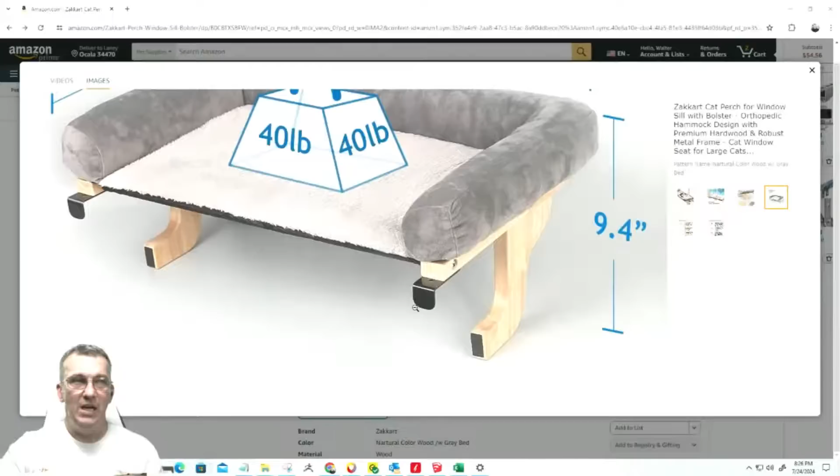Our hooks, the hooks that go over the windowsill - yes, we could probably find these somewhere and buy them in bulk, but it's going to be easier for us to buy the bar stock, cut it to length, make a jig for bending the little hooks, drilling the holes and everything. We're going to make our own from raw bar stock, so that'll hook into the windowsill versus trying to buy a 20 pack of this or that and it not being the right product or the right size. Because most windowsills, on that hook, about a 1/2 inch is all you have to work with, so the hook can't exceed a 1/2 inch, otherwise it won't sit properly on top of that sill.

So this is kind of the market item we're going for. If we look at cat perches for windows, they have suction cup perches, wooden ones, wooden ones with engravings, and wooden ones that are like hammocks. That cat looks scared as all because he knows there ain't nothing holding him up but this piece of cloth that's sagging. There's no support there, look at that shocked little cat. But there's a lot of them on the market, ranging from $40, $39, this and that, with 4-star, 5-star ratings.

People are buying, right? So 50 of these products bought last month — not a big market share, 50 isn't a lot in a month from Amazon. It's a small amount, but 1,000 of these wooden ones were bought in the past month. That's getting more like it. I'd love 1,000 sales a month for my items, but there's a lot of them out there, so they're saturated in the market.

Now, in the files that I gave you, each and every one of you have a spreadsheet. This spreadsheet is a business product pricing workbook. I spent a lot of hours creating this workbook, things are linked together, and there's formulas and all kinds of stuff that will help you with setting up your products and all.

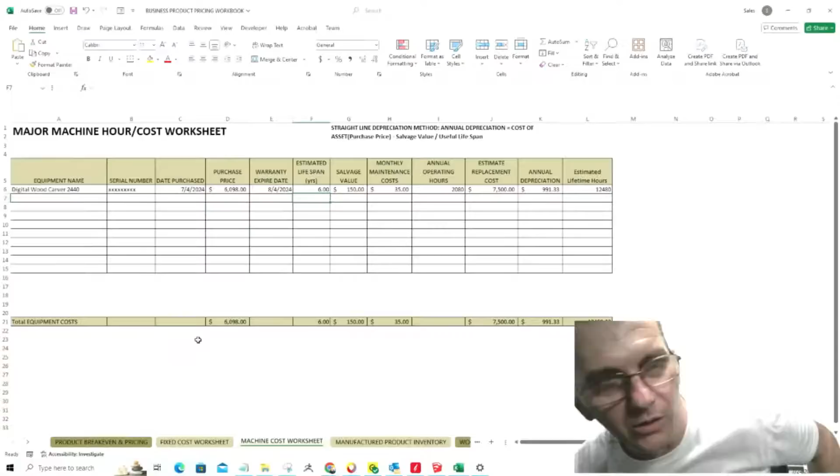We're not talking every little router and sander and everything. You got those little handheld tools, they don't mean jack. Machines, your capital assets, your CNC machine, anything over $1,000 essentially, basically. Your CNC machine, large table saw, big drum sander, whatever you might have, your capital assets, not your little handheld palm rotary sander or your $200 miter saw. That doesn't go in machine cost.

In this example here, we have a digital wood carver 2440, purchase price $6,098. Now we want to keep track of when the warranty ends on this. Estimated lifespan - how many years do you realistically expect this machine to be in production? And at the end of those years, when its usefulness has kind of run out, what's our salvage value? If I were to take this to a scrap yard, what could I salvage it for?

Any monthly maintenance costs on it, your operating hours - what realistically do I expect to operate? Now for my machine, I expect to operate 2,080 hours a year. That's 8 hours a day, Monday through Friday. So annual operating hours on that machine, if production is good, that's what I expect that machine to run. That means I have an estimated lifetime hours of 2,080 times 6 years, so there's 12,480 lifetime hours on this machine.

So in depreciation, every year your machine depreciates. Basically depreciation, for those of you that are unaware, you have your purchase price, you subtract your salvage value from that, and divide that by your estimated lifespan. So in my case, 6,098 minus that 150, divided by 6 years. So each year I'll be depreciating $991 a year on that machine. Alright, so once we have those, fill out the form.

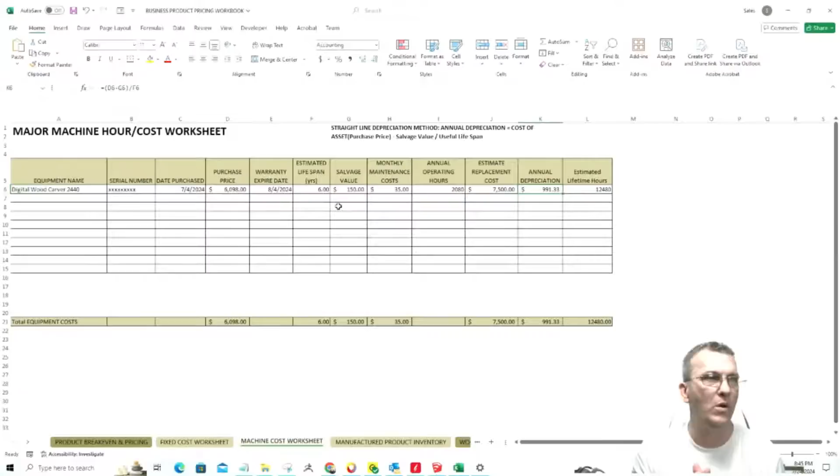Know your stuff, get your machines figured out. And if you don't know the exact answer, just figure out what you want that machine to be. If I thought my estimated lifespan was 10 years, which I could absolutely get out of a CNC no problem, but I think in 6 years there's going to be more advanced options I can go out and buy. So this particular machine will be in production for 6 years, 12,480 hours roundabout.

Alright, so once we have our machine cost, and in our other workbooks here we have our products that we're going to make. We'll come back to that one last, but wood inventory. In this particular sheet, there's drop-down lists of all your plywoods, or majority of the major ones, so you can choose from the drop-down list. And for your dimensional lumber, there's a list of different types of lumber and wood. But you're going to fill in the blanks: length, width, thickness, and the grade.

In this case, Baltic birch grade BB. Side B means that one side is great, beautiful - the other side is not so much. So it's a BB, right? One side is beautiful, the other side is basically beautiful. That's not what the BB stands for, but it's not a premium two-side.

But in this case, we need to break it down, right? This 4x8 sheet has got to be broken down into board foot, square foot, and square inches, because some of our projects only use a certain amount of square inches. And then what is our price per sheet? Now, it used to be I could get a sheet of Baltic birch 4x8 for $30 a sheet. Now roundabout, we're in the 100 something.

$98. Are you guys still with me? Am I losing something, JR? No, I'm good. Oh, okay.

And so now once we know our price and everything, now the formulas are going to start kicking in. It's going to tell us our price per board foot, per square foot, and per square inch, right?

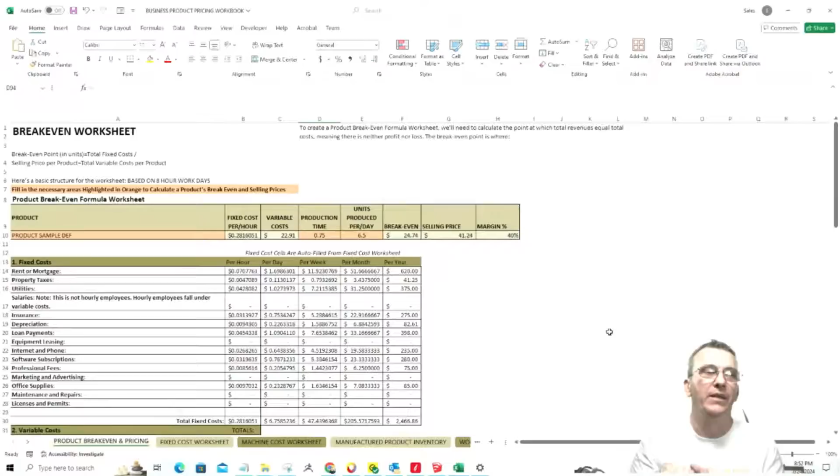But what does it cost to actually make that product, to get it made and out the door? That's what we have to determine. And then that's going to help us determine what our sales price is, our margin, and things. So let's take a quick look at this sheet.

Now, what this sheet does is this top area allows you to — you don't put your whole inventory in here, it's one item at a time. You're using this one sheet to determine what your price is for a particular product, your break even and your sales price.

And so in this case, I do have a drop down, so any of the products that are in my product list, my inventory list, any products there will show up here. So I can say, okay, I want to know what my product pricing is for product ABC.

Now, right now the fixed cost per hours, the variable cost per hours, the break even, the selling price, and the margin — those are all formulas, those are going to get populated. Those gray areas are going to get populated by the sheet below. The orange areas are the areas that I need to fill in.

What is my production time? Again, from machining to shipping, whatever stations it's going through, how long does it take? And this isn't like hustle, bust your ass —

going to frantically do it so I can do it in the smallest time possible. Working at a regular, normal pace with regular breaks and potty breaks and all of that stuff — what is the time from start to finish on a product? If we spent time working on a product, what's that time? And anything beyond that's called slack time, we'll talk about that in just a second.

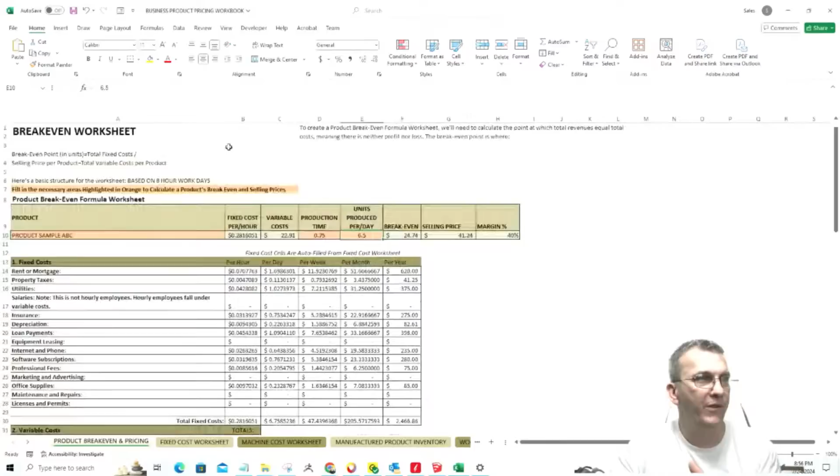Now let's come down to the variable cost. Just so you know the formula, what we're dealing with here: our break-even point per unit is our total fixed cost divided by the selling price per product minus the total variable cost per product. And so in our case, the total fixed cost per unit, per hour, are going to be up here. So for this one, the total fixed cost is about 28 cents, 29 cents, per product.

But let's look at our variable cost. So let's start with labor. Labor is time times wage — that equals labor. So with time, we have our hours worked. Again, regular work hours, not rushing, trying to get things done — regular working hours. Come in, clock in, do my job, clock out.

Breaks, potty breaks, lunch breaks, smoke breaks, whatever it is, all those other activities fall under slack time. It's hard to keep track of all that, when somebody goes to the bathroom and everything. So we're going to use a fixed percentage, about 25%. 25% of our 8 hours worked is going to be breaks, lunch break, breakfast break, potty break, that kind of thing. So we're going to use 25% as our slack time.

So in this case, on this product, an hour and 45 minutes was worked. The slack time was about 43 minutes of that, potty breaks, lunch break, 15-minute break kind of thing. So the total remaining time is 0.77 hours, about 47 minutes of work time on it. Again, I can produce about 6.5 units per day.

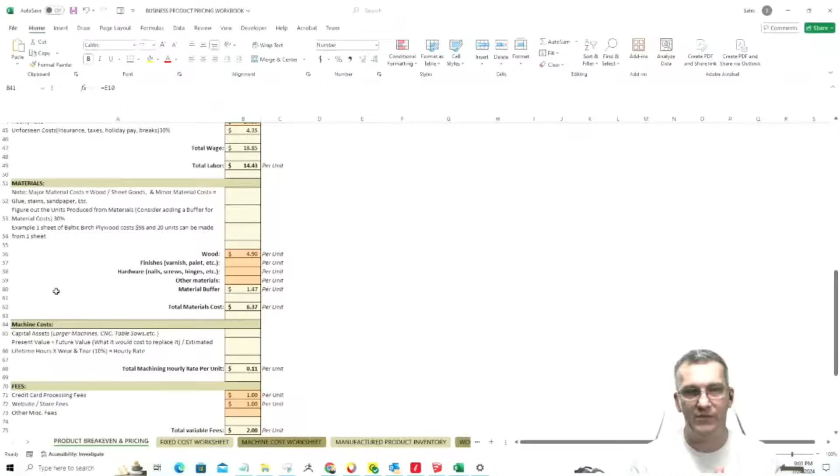Machining costs - so when our machines are running, the capital assets, large machines, CNCs, table saws, etc., not your little palm sanders. We have our present value plus our future value, we'll talk about future value and go back to the sheet for a second. Future value basically is what it would cost to replace that machine. You figure out what it would cost, divide that by your estimated lifetime hours, then multiply by your wear and tear, roughly about 10% wear and tear. That gives you your machine rate.

Now, if we go back to our machine cost worksheet, on my $6,098 CNC machine that it cost me to purchase, in the future, if I ever had to replace it, I'm estimating it's going to cost me somewhere around $7,500, because of inflation, it's not going to be cheaper, it's probably going to be more. So to replace that particular machine, I'm estimating it's about $7,500. Coming back to here now, the total machining cost - our present value, $6,098, plus our future value, $7,500.

Divided by the estimated lifetime hours, 12,480 lifetime hours, and then multiply that by 10%. We've got a machining cost of about 11 cents per unit.

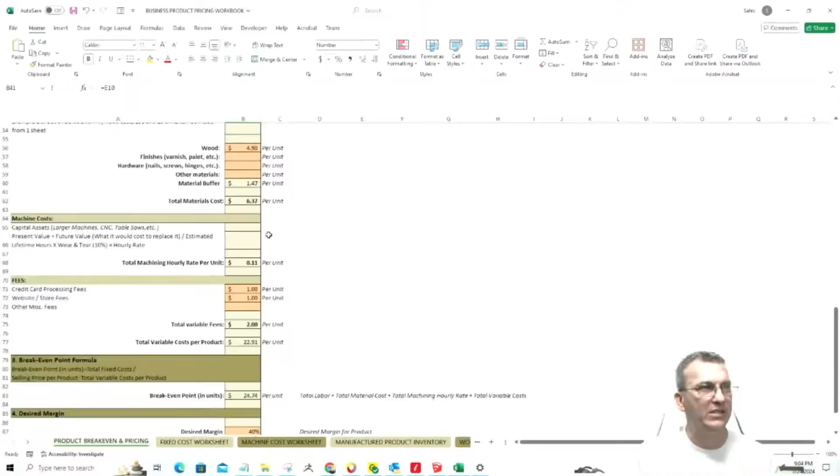$22.91. So I take that $22.91 for the break-even point. Break-even is total labor plus total material cost plus total machining hourly rate plus total variable cost, all added together. So I've got $22.91, 11 cents, $6.37, $14.43, and that is it. So we're at about $24.74 per unit.

Now ideally, the desired margin that I want to make on this product, I can set my own margin, and that's all going to come from market research. I can set whatever price I want to sell this item for. If it doesn't sell, I need to change it, I need to look at it. So what's my desired margin? For this, I'd like to make a 40% margin.

So I take my break-even point and divide it by 1 minus the desired margin. So 1 minus, in this case, 0.40, that divided by, which in this case is 0.60, if you want to know. So 1 minus 0.40 is 0.60, okay. So if I take my break-even and divide that by 0.60, my total selling price is going to be...

$41.24 on this particular product. That's if I want to make 40% above my break-even, that's where I'm going to be at. So I can sell this for $35, or I can be at this price if I want to make my 40% margin. But having that margin gives me room to work with for sales, discounts, promotions, and things like that.

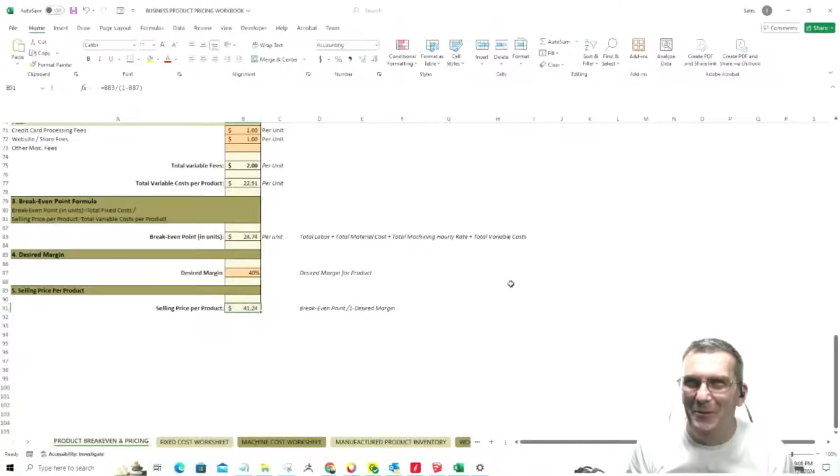People will pay a premium for a premium product. You get what you pay for, and sometimes lower isn't actually better. I've sold things where I felt like I don't want to be too high, I want to be fair and fun and just give it away. And it shot me in the foot. One, I wasn't making hardly anything on it, and also it kind of cheapened my product.

Sometimes I'm overpriced and it just doesn't move, but then I find that sweet spot where things are going well. Now that I know more, I have more control on my business expenses, machining and labor, and I'm the only labor there is. I have an hourly rate myself, kind of thing, I pay myself, but all that stuff is figured in. Once I know that, I can figure out these things, and this sheet is hopefully to help you with that.

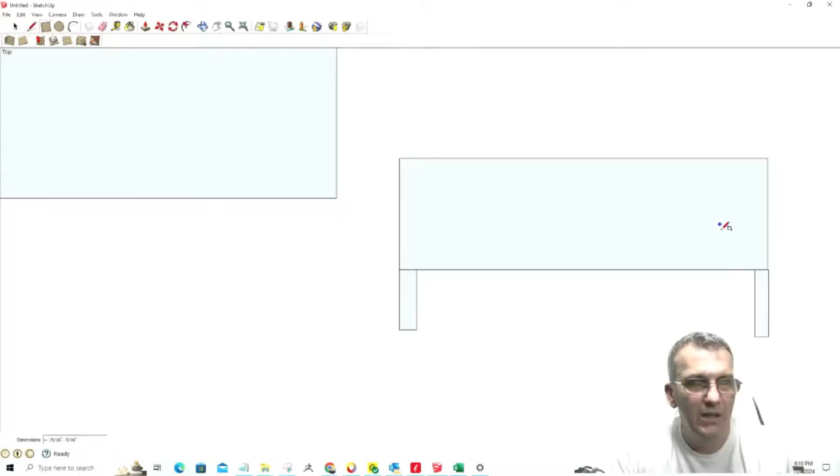So on my side view, I'm going to have the brackets, which we're going to actually create in just a second. I'm just giving you a rough drawing here. And then on this particular piece, this bracket, there's going to be a rabbet, and that's in the wrong spot. Bear with me just a second, let me undo that.

There is going to be a platform that spans between these two brackets. It's going to be flush with the top of the brackets. The brackets are going to be able to slide back and forth. We'll have our screws and our inserts. But this top big box, that's my cushion, it's going to sit on top across the whole thing, covering all the way across, and it's going to have a nice flat, sturdy platform, no little rods. We're going to be above and beyond what anyone else is doing, and we're going to be able to offer a little bit more of a premium for that. It's going to be the window perch for the Queen of Queens or the King of Kings.

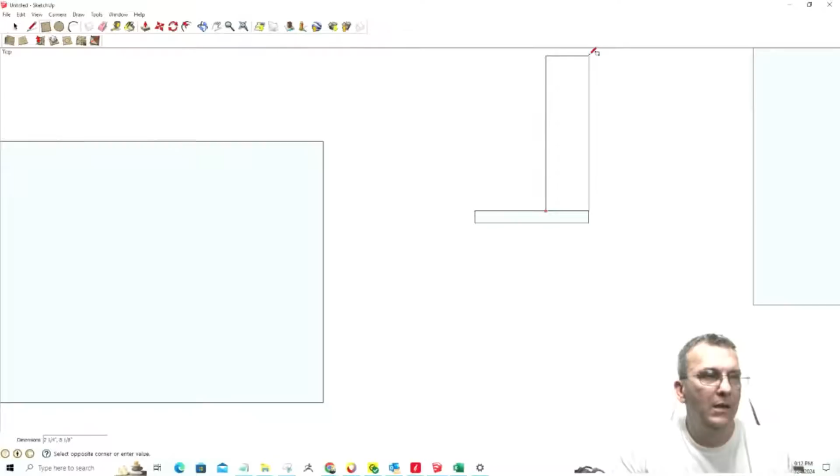So this is just kind of a general rough show of what's about to happen. So now on our part, let's first draw out a scenario of like a window sill. Imagine, if you will, let me undo this, let's go here, and let's say that, right here.

All right, let's imagine that this upper block right here is my window. This block here is my window sill, and then this is my wall. So on these three items, this lower rectangle is my wall, my windowsill, and my window. And on my window, there is a small lip that's kind of like a channel. Bear with me just a second.

Okay, my product is going to hook into that windowsill, that window framing, that metal framing. It's going to hook into that framing, and the legs are going to come down and touch the wall. Now, some of the things I need to consider: the area of the windowsill, the far side of it, and I'd like to kind of stay in line with what I saw online. So this windowsill has to be kind of an average windowsill.

My windowsills at home are about 2.5 inches. From the window to the end, it's about 2.5 inches. As long as we're under 6 inches from the wall to the end of the windowsill, we're good. From the actual window to the end of the windowsill, 6 inches. From the wall to the end of the windowsill, because sometimes windows are recessed in, that matters too.

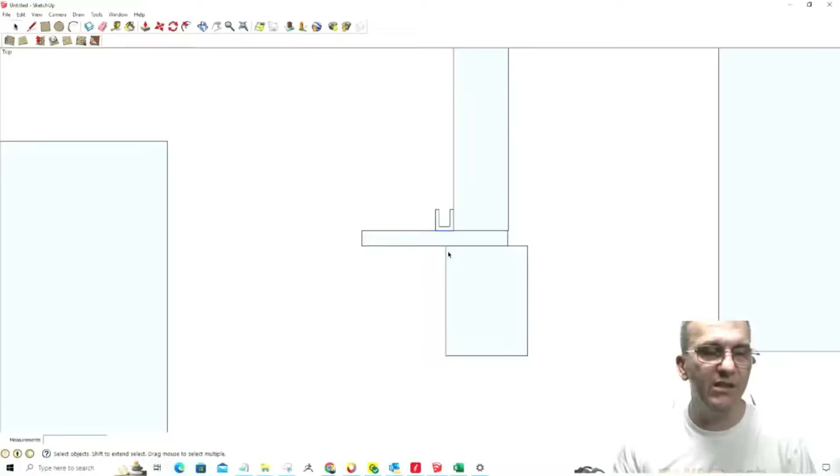I want to try to be under 3 inches, because my leg is going to... hold on, bear with me. Let me go in and trim some things.

Select this and hit delete. No, we'll leave that one there. We'll get rid of this one. Get rid of that one. Get rid of that. Hold on, leave that one there. Delete that. Okay, this one, bear with me. This one. Oh, Laney, come on now. Hold on a minute, let me try that again.

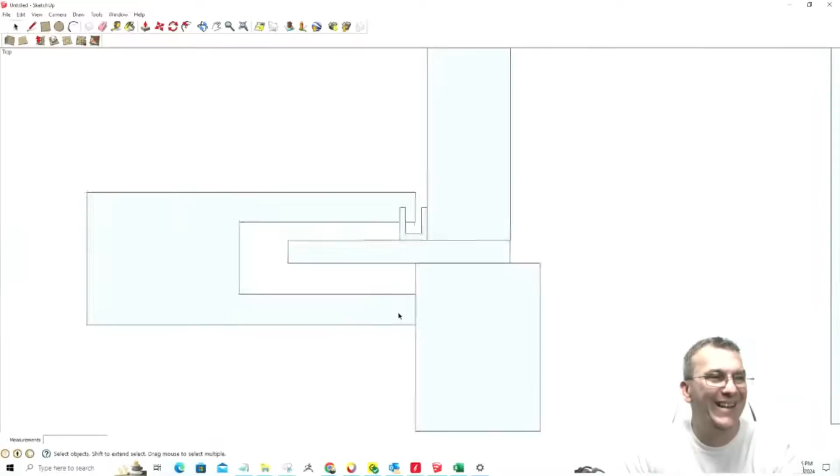Now, of course, I'm just rough sketching this to show what's going on. There's going to be a metal hook underneath the piece that hooks onto the windowsill. There's an opening that comes around, then comes in on the wall, and my bed sits up here. So this area goes up and rests against the wall. Remember, I have that rubber foot that goes on there to prevent marring. That distance, when I make my piece, can slide as far back or up depending on where my wall is.

It's about 3 inches. I'm going to have 3 inches. So I want to make sure my windowsill doesn't exceed that, or this particular cat bed won't fit that need unless I change up my bracket design or something like that. With that being said, let's lay out the actual part.

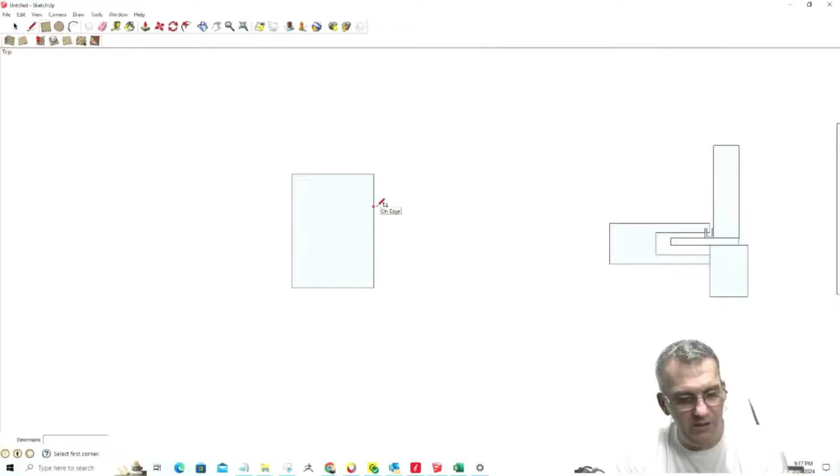Okay, so the part is going to be cut from a piece of material that's about 9 inches by, we'll call it 7, and I believe 7 1/4 is a 1x8. Do they make 1x8s or 1x9s? I think they make 1x8s. I know they make 1x4s. They make 1x6, 1x8, 1x10, and 1x12. Yeah, so 1x8 is 7 1/4. That's what I want: 7 1/4 by about 10 inches. So 7.25, 10. Let's do it the other way around: 10, 7.25. There we go.

Now on this part, so you can have a visual, let's go back to here. The part we're focusing on right now is this lower bracket right here, not the upper piece, but this lower bracket. This is what we're making. The distance from where the part goes against the wall to this upright is about 3.5 to 4 inches, that opening, and it comes right straight into the bottom of this.

Now, from the wall to the back of this part, if this was a rectangle, we're probably in the range of about 7 1/4. It could be even around 6. It could be whatever you want. We're designing it on our own right now.

So in this case, I can use guidelines to help me with my layout. We'll bring in a guideline. I don't want to bring my part right up to the edge. I want to cut the part out of this piece of wood with a nice clean cut around this bracket, and there's 2 of them we're making. I do not want it right up against the edge of the wood, just in case my edge isn't very clean.

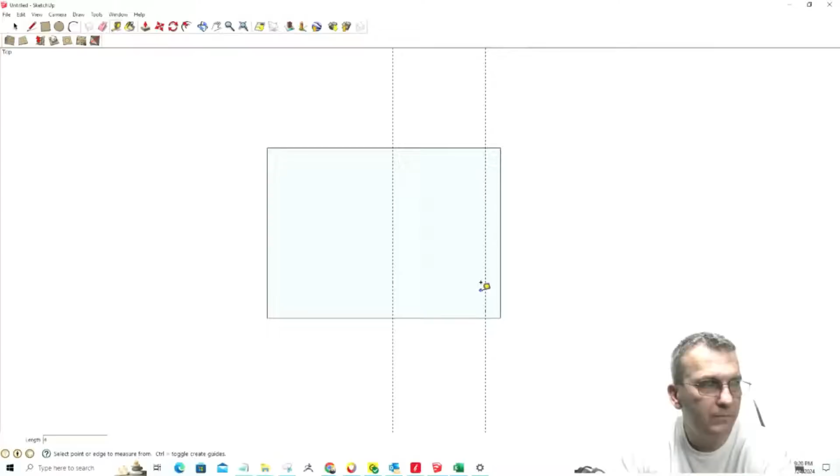And from here again, I'm going to come back. Let's say that we go a total of 7 inches. Now, from here, this is going to kind of create a bottom part.

So from here, I'm going to come up now. How wide do I want this leg? That's going to be the key thing, right? How wide do I want this leg? Believe it or not, I'm going to base that off of my rubber foot, the rubber foot that I'm going to be using.

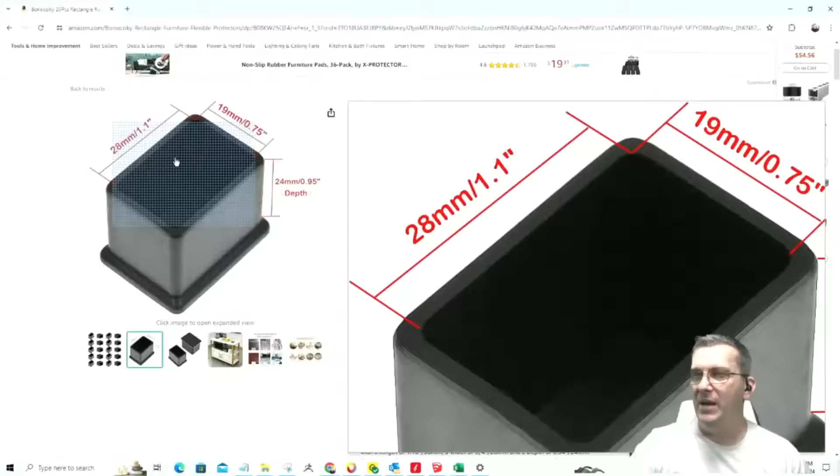It's going to look like a bit of quality. Now, on this one, it's 3/4 inches wide - that's how wide my stock is - and it's 1.1 inches wide. These come in different sizes, but with the length, in a lot of cases, what I found when looking at these rubber feet, with the length comes, instead of 0.75, it might be 0.78 or 0.8. It kind of loses its width, and I don't want a sloppy foot.

I want a nice foot that fits and everything. And I've got to keep in mind, my stock is 3/4. I am going to be doing some sanding, some light sanding - not really any need for aggressive sanding. So there's going to be a little slight taken off, but still my foot should fit very well, but I don't want it sloppy. So in this case, 1.1 inches is kind of what that foot is.

So let's come down here in our design - let me grab my tape measure again. Stop playing the game there. There we go. I've got 1.1 inches, or I've got 1.49, or 1.5 inches. We'll just go 1.5 - let me undo that. We'll just go 1.5 because it stretches.

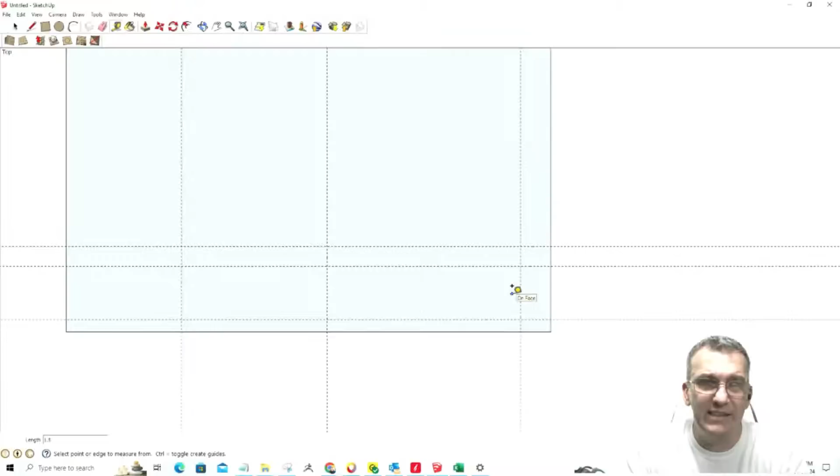1.5. And so my foot going against the window is right here. And I might like that 1.5 inch going against the window versus the 1 inch. It all depends, and it's not a lot of weight - about 40, 50 pounds it'll hold, things like that. So it doesn't have to be very big and bulky. In this case, I'm actually going to go with the 1.5.

So in my drawing, I'm going to go ahead and draw out the rectangle here all the way to here. And then this part is going to come up here all the way up. And how tall - which we haven't laid out yet, so I'm not going to draw that part yet - but how tall this piece is from the bottom of it up, it's going to need enough clearance to clear the windowsill, which is typically a 3/4 windowsill, and come around, have a little bit of an air gap.

So I'm going to call it, on that bracket, I'm going to call it 5 inches. So I'm going to come up here and go 5 inches. And I'll go ahead and draw that out. To here. Now I'm going to start - let's hide the guidelines for a minute. And I'm going to take and...

I'm going to start fancying this up a little bit. So I want to get a little bit of a radius going on here. I like a nice transition coming in. And then on the back, I can reduce some of the waste and have a nice radius come in there as well. This is going to stay square. So let's go with an arc. Let's say that I start transitioning into a nice curve here, and here, let's pick a spot.

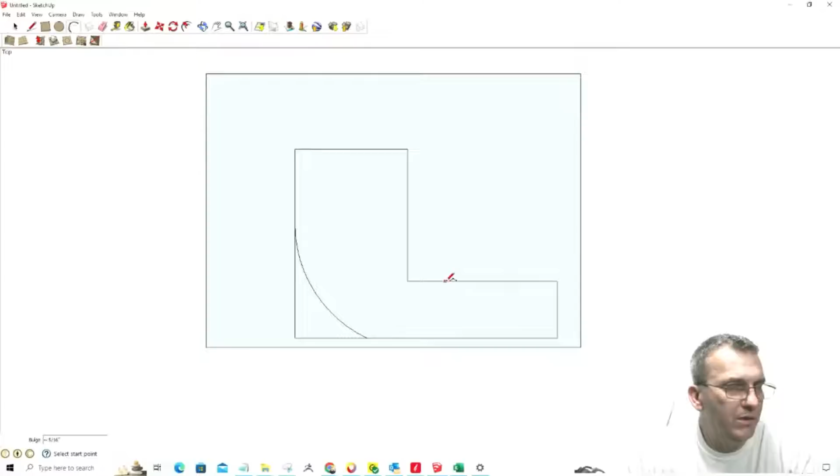I want this to start making its curve. I'll use my guidelines again. Give me just a second. Let me view the guidelines again, because I need to put a guideline at least at 3. That's 3, and that's 4. So let me find 3.5, 3 5/16, 3 1/4.

So my window sill, like I said, from the wall to the end of the window sill, it's got to be within 3 inches, right? So 3 1/4 clears me. 3.5 is better, and that kind of thing.

So what I want to do is start transitioning here. Let me go back to the arc tool. And let's turn the guides off.

Now, the thing I love about SketchUp is I can come in and start taking things away once I have them drawn. Now I probably want this to be a little bit smoother, but I will fillet this. I'll smooth everything out in Vectric. When I'm laying out the part to cut out, I'll do all the smoothing of the fillets and fine tune everything. SketchUp I just use for my rough concept, but then I'll fine tune everything in Vectric.

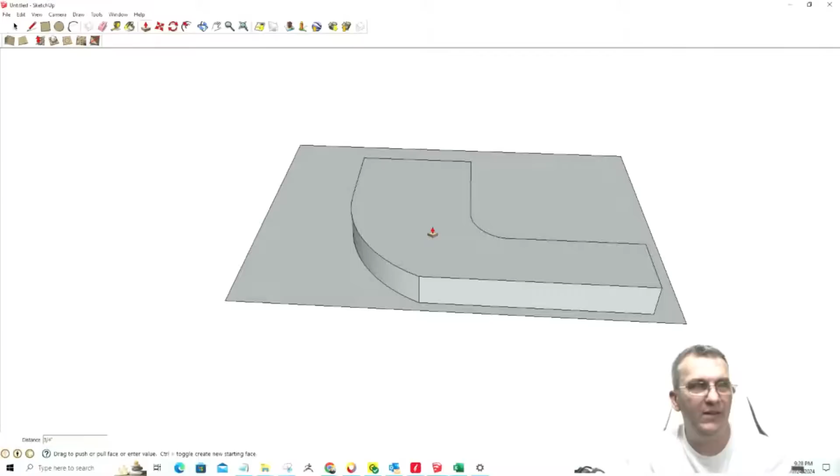All right, let's go ahead and start doing some push-pulling here. So let's go to P for push pull. This part is going to be 0.75 inches thick. We can get rid of that. Delete.

Now, on my part, let's get a guideline in here, and let's find our center point. Oh, got to turn the guides on. Yeah, about coming in from the edge, I want to come in. My hole, my 9mm hole is about

That I literally do not want. I want to make my hole that size. I'm going to use a 9mm drill bit because that's what comes with the threaded inserts. So that's the size bit that I'm going to use. I'm also going to buy some extra bits in my inventory for production and all. But I want to make sure that when I'm making my drill hole here,

0.354 divided by 2, give me just a second here. Sorry, ladies and gentlemen, got to cheat tonight. Calculator. 0.354 divided by 2 is 0.177. When you're drawing circles in SketchUp, it's radius, not diameter. So 0.177.

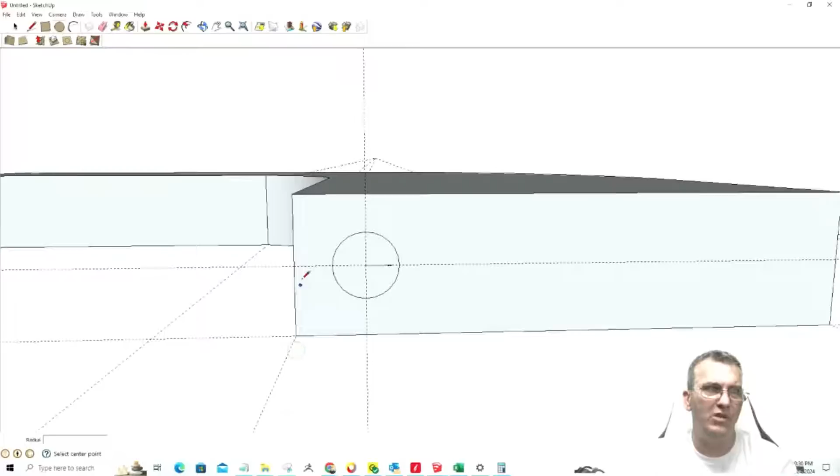I want to make sure that I have plenty of meat on the end when I put this thread in. I don't want blowout. I've got plenty of room to work with. I don't need to be so close to the edge and things like that. But I do want stability as well too.

All right, so let's come back in here, and on my guideline, I can come in a half inch off each end. And my 0.177. These will be where my threaded inserts go.

But now, on this part, right, like I said, I got to draw in the bottom here. Give me just 1 second. Let me turn off the guidelines. And let me take a straight line and go from here to here. There we go.

Okay, on this part, and of course this is an ugly looking bracket. I'm going to clean it up and make it look pretty here in just a second.

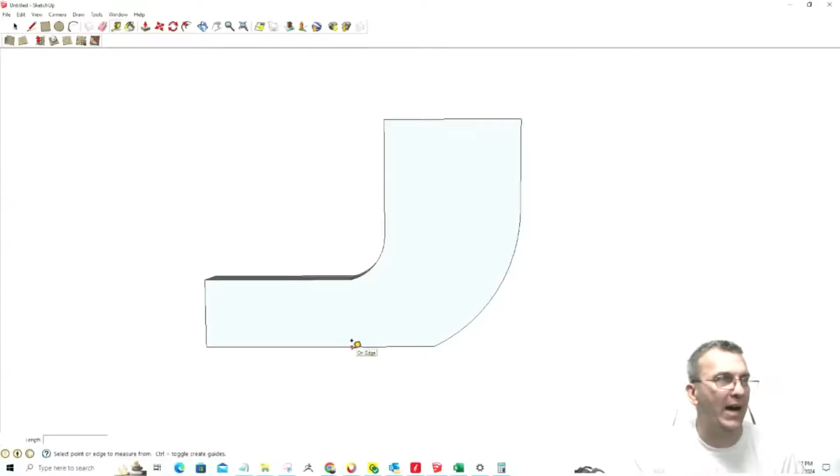But my thing is, do I want to create a jig that each of these parts can sit upright in, and they can stack side by side in this jig? And depending on the height of my jig, and in this case, remember, from the bottom to the top is 5 inches.

If I have the clearance on my CNC, can I make a jig where these can sit upright side by side and get mounted on this jig in a particular spot? I can make a platform that mounts in a particular spot on my table, and I can mill these 2 holes on each part. Or do I want to do them on the drill press? Do I want to try to do them by hand, which I don't recommend?

What can I do, right? What's going to make it easy? Can I make a jig for the drill press? I might have a nice little drill press table and a jig that, when it sits in, drills all these holes. I can move them down bit by bit and flip them around. But then it's on me to make sure I'm centered between each part when I move it to each router bit.

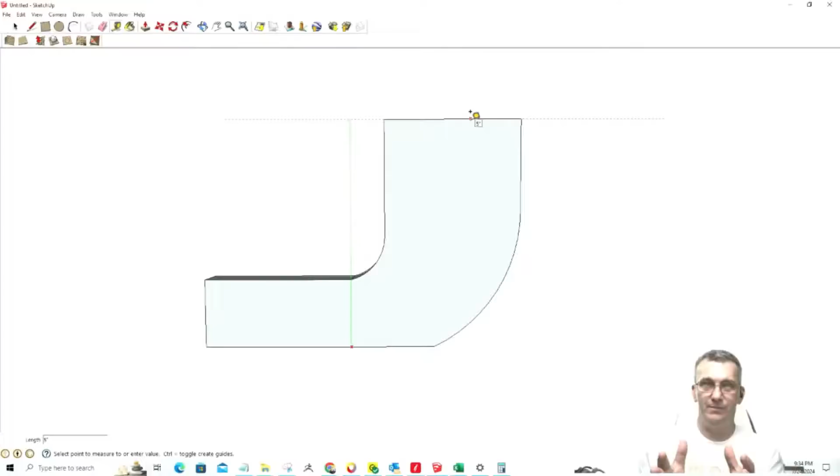But let's say I could put this in a jig. Then I'm going to draw out in my Vectric software the size of my jig, and I'm going to draw out 3/4 inch rectangles stacked side by side with my hole placement 1/2 inch off each end. I'm going to create the tool path based off the center of that, or the left side, whatever it is, of my jig.

I'm going to base that off so I can put these parts in, and it'll go mill these 10 sets of holes and stuff. On the drill press, hey, it's just time—I add that into time if I've got to do it on the drill press. But I'm also going to try to set up a production situation where I can get things perfectly positioned every time, and it might come down to something as cool as literally a jig.

We can make this all on the CNC, right? A jig with a little crank that, when my part is aligned under the bit, I can turn this crank and it slides everything over by 3/4 of an inch. So one turn moves all my parts over. It's like a little jig with a bed that actually moves.

I can use a bolt, a threaded bolt—it doesn't have to be a lead screw or anything. It could be a threaded all-thread bolt from Lowe's with a set of nuts on it. All I need is a handle, and I just need to know how many turns gets me from one part to the next dead center under my bit. So I can crank that many turns, drop my drill press, crank that many turns, drop my drill press.

And then can I turn these parts around in some way so I can do the back holes, or do I shift it? All these things—this is what I'm working out on the production side of things: what can I do to make the time to make this part less, and what can I do to make it quick and easy for me, where it's not a pain in the ass, and where everything is concise and precise, because quality of product matters, right? From the price that I'm going to be charging.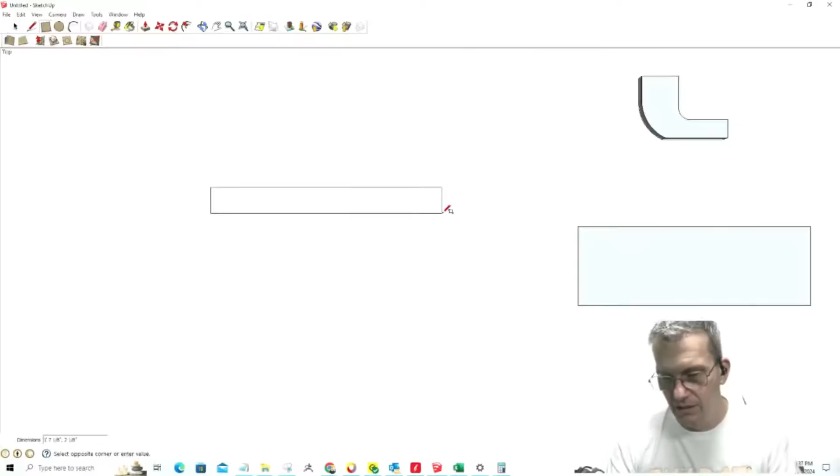Bear with me just a second. This is going to be a total length of 15 inches. And the width we'll figure out in just a minute. But let's turn my guidelines back on.

Off the edge, 0.25 inches in. Use the right tool. 0.25 inches in, there's going to be a slot. This slot, and also the slot is going to end, it's going to start 1 1/4, and it's going to end 1 1/4. So this slot...

has to be, remember, this is the slot where my bolt head is going to go down in. Remember, my bolt head is 0.5 inches, that little black oxidized bolt we talked about earlier. It's a 1/2 inch, so I don't want it tight. I don't want to have to beat the bolt down in there. I want it to be able to slide. So I don't want to have to take these bolts out. When this thing gets assembled, these bolts can get loosened and they can slide back and forth, then get tightened into position.

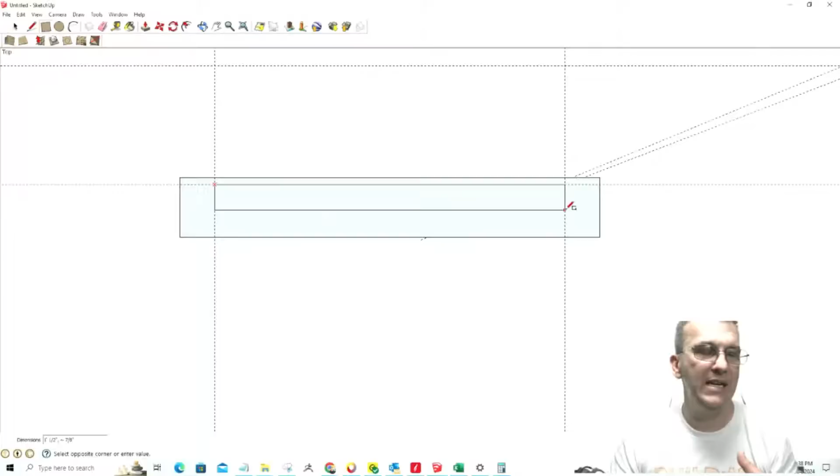So on this, I don't want a whole lot of slop, but the upper part of this is going to have a slot on it that is, let's call it 0.5625, so 9/16, so 0.5625.

Let me see what dimensions first for me. So the length, 12.5 inches, comma, 0.5625. Now, inside this slot, centered in this slot, is a 1/4 inch slot, where my bolt's going through, the bolt body, not the bolt head.

So let's get a guideline going on here, tape measure. On this center part, we'll get our centerline defined, which is right there. 1/8 inch from that center in that direction, 1/8 inch in this direction. This will be my slot.

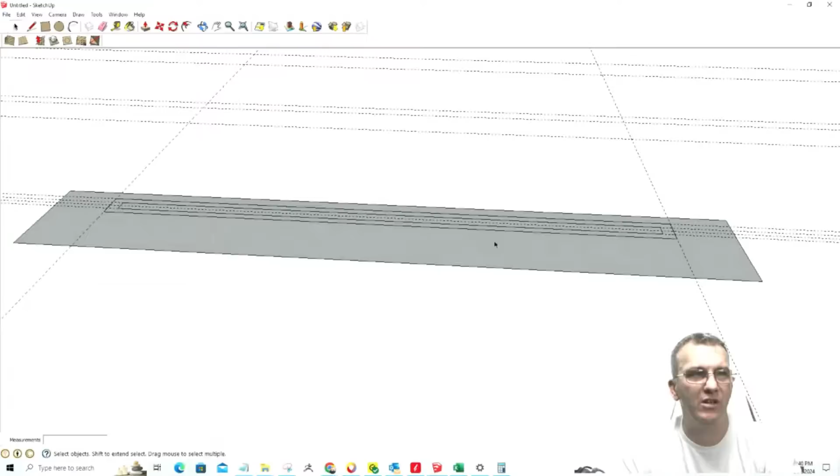And let's go ahead and extrude this up so we can start making sense of it all. It is going to be 3/4 of an inch thick because that's how thick my material is. So this whole thing is going to get pulled up 0.75. And in here, this is going to be pulled up even with it for right now. That 0.75 will bring this one up with it too, so all these are at the new level now.

All right, so this slot right here is going to go all the way through. Okay, so that one's going to go all the way through.

Now, this one is going to get recessed just a little bit more than my head thickness. Remember, on my bolt, the head thickness is 0.11. So if I go down 0.125, I'm golden, I'm good, just under the surface. I can go down more than that, 0.15, whatever, but as long as I'm 0.125, I'm good.

So in here, we will come down 0.1. I'll just make it 0.13. Okay, and let me see what I got going on here. Bear with me just a second.

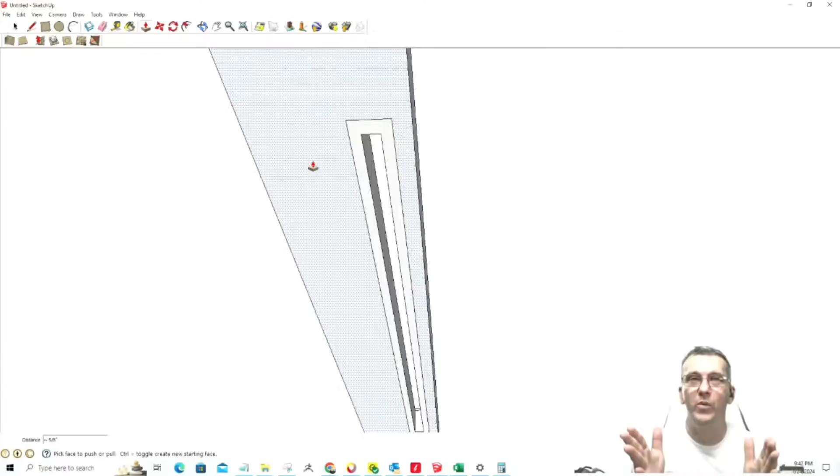Now here's the question: are we doing shoulders to where a tenon is going to go up into this area right here, and the shoulder's right on the bottom? So are we going to create that tenon, or is our whole 3/4 inch piece going to go up in there? So what I'm asking myself is, in this part right here, in this area...

which I have defined as the center of where my bolt head and everything is, so it's not on my piece. If I come in and take a guideline from the edge of my part, or not from the edge, if I just find the center of my part here, okay, and from that guideline, if I pull this out 3/8 of an inch, and if I pull this out 3/8 of an inch, let me draw the rectangle there.

And let me get rid of the guidelines. I know it's hard to see, but this will make sense in just a second.

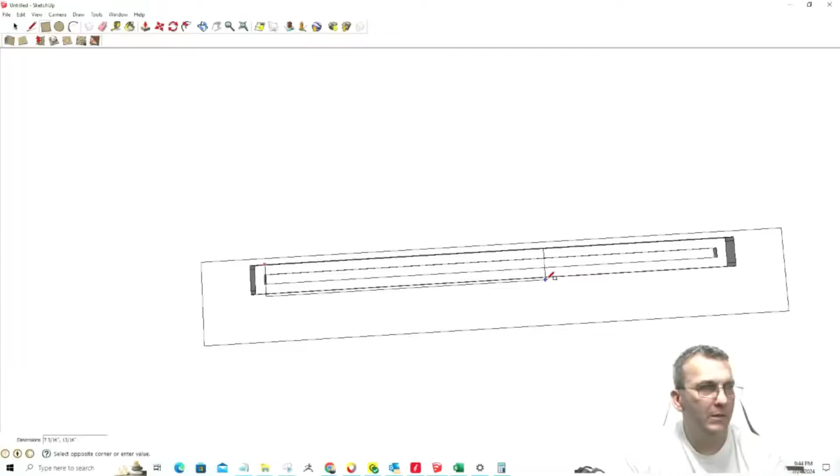When this gets pushed up, it's only going to be up in there a little bit, right? So my question to all of us is, my part going to just fit in there so that it slides back and forth in that slot as a whole? And remember, my screw is going to come down into my threaded inserts, down into that part, right? And it's going to recess there. But is my part going to sit in that groove like this and everything? Or is my part going to have...

Let me do it this way. Let me do it this way.

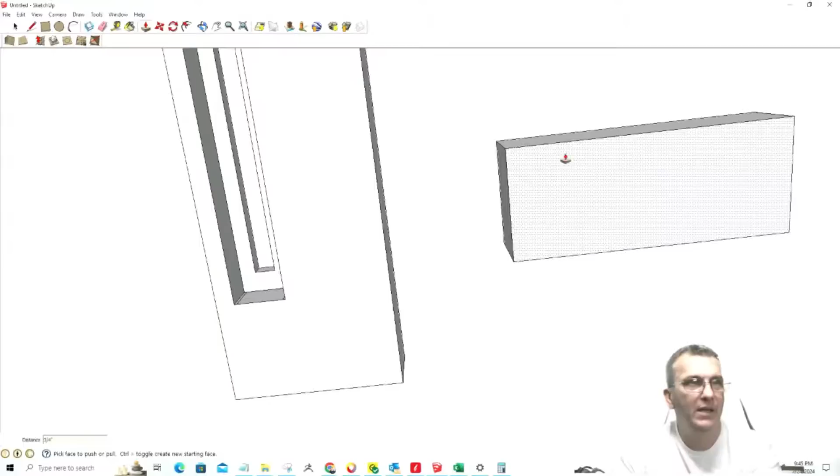Bring that in a 16th. Bring that in a 16th. All right, let's take a 3/4 inch block. Push, pull it, 0.75. Let's come up here on the top. Let's take a 16th inch there. Come on, draw it. 0.0625. Hold on a second.

Oh, I got the guides turned off. Let's try that again. I know this is getting confusing with all these guides. I'll delete them all in just a second. Actually, let me do that right now. Edit, delete all guides. All right, let's start over. So, 0.0625.

On this side, 0.0625. All right, let's draw a line from here to here. Let's draw a line from here to here. Let's pull this down. Let's go a 1/4 of an inch, 1/4 of an inch. All right, triple click, G for component.

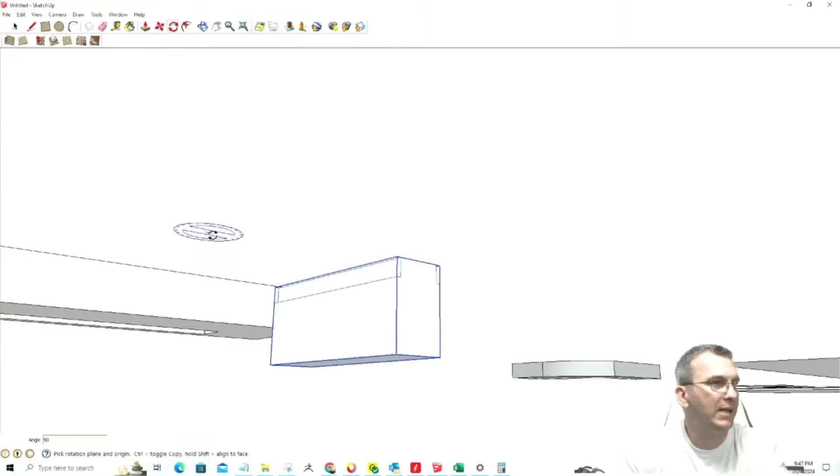All right, let's rotate this bad boy so we can see 90 degrees. Okay, edit, delete all guides. So on this part, we're going to take and we got to rotate it 90 degrees. So this part, if I move this up under here... see if I can get it to, it does not like me today. Come on now, you're confusing everybody. Stop moving like that. There we go, we're getting somewhere. Hold on a second, I'm getting there now. Okay, oops.

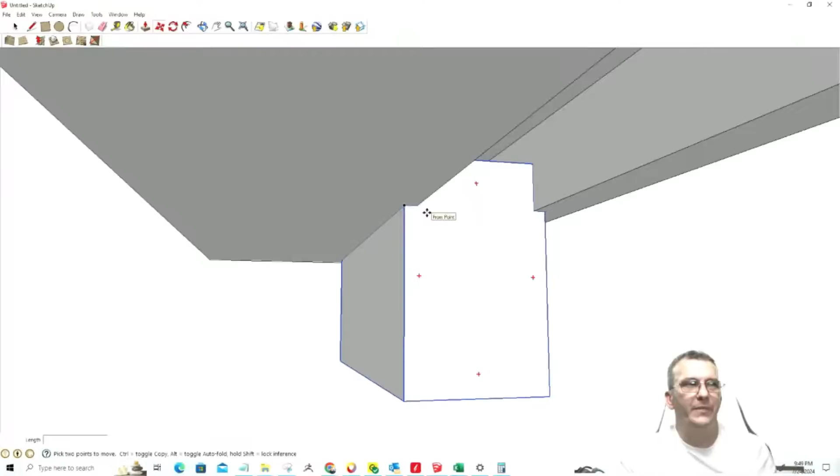So is my part going to have a shoulder on it where the tenon goes up into this slot? And of course, on the tenon here, it would probably be a little bit taller, so they meet right there. But is it going to have a shoulder on it, which is going to give me the best stability? I think having a shoulder, and I would probably go a little bit more than a 1/16. But I need to stay more than 0.55 inches because of the upper slot and everything. But also I have to remember there's a threaded insert in the top of this, so I can't go too narrow, that 0.354. So I only have a certain amount of room.

So in my part here, which is this hook part right here, if I brought this in a 1/16, 0.0625, I still have plenty of room right there. So I could actually come, I mean, my shoulder, realistically, I could come in an 1/8 here. I don't want it too weak or fragile and everything. So a 1/16 wouldn't be bad on both sides.

And then, oops. If I drew a line from here to here and a line from there to there, let's go 3/8, 0.375. So on this part, if it looked like this and everything, to where that part went up into that slot on the bottom, that having that lip, that ledge, gives me a little bit more stability this way.

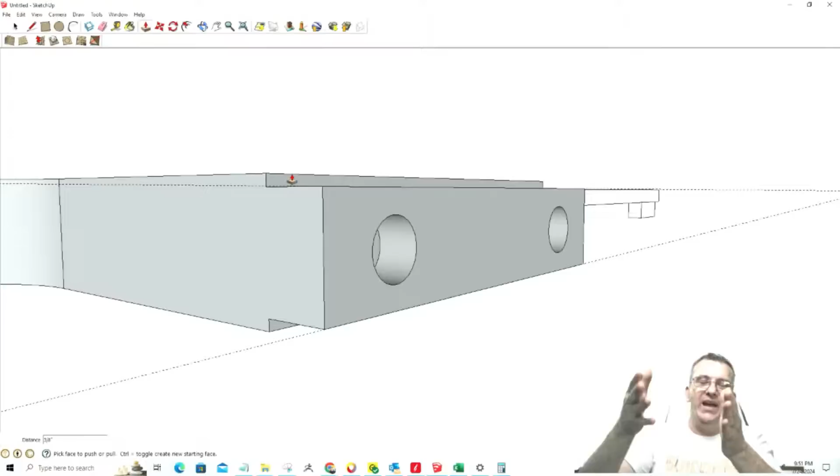I mean, I'm going to be up in the part enough that I'm not really concerned about it splaying or anything like that. Again, it's not a person sitting on this thing, it's just a cat, but still having the slot and the tenon and everything is going to give me more stability from splaying and everything. It's going to give me more stability and all. So I would opt to design this.

So, knowing that I would opt to design this, now I need to set up my other workstation that we were talking about, my router station, with my slot cutting bit, with a spacer between the two slots and everything. And they have bits where you can adjust where the spacers go and all.

But it would be, I could probably make it, I could reduce this down a little bit more. But if I left it here, it's 5/8, right? So there'd be a 5/8, and it would, when I run it through the router, there'd be a fence all lined up, everything with the perfect depth and everything. So all I have to do is run the part in, and it cuts those two shoulders off at the same time in one pass.

If I'm going to do it in two passes, for whatever reason, I would have a place on my fence that all my parts get the one pass, boom, boom, boom, boom, boom. And then I can literally move that fence perfectly without a bunch of fiddling around. I would set up a way that I got almost like a positive stop for myself, so I can move that fence back - it could be a board clamped on the table for all I care - but I move it back and it's perfect, and I position it. Now I can run that again, and I'm at my perfect 3/8. So it's all in the setup.

So my router bit... let's go with it would be a tenon router bit. And they have tenon router bits with spacers or with washers or bearings and all that stuff, but that's a rabbeting bit. I want one that's adjustable, that I can change - I can remove the bolt and add more holes to it and change my rabbet thickness. So I love CMT's versatility. On CMT, I can take the bolt out and remove these two inner blades, so I'm just using the outer blades.

I can create whatever size thickness tenon based on whatever adjustability, so I've got to find the right bit. There are slot bits where I can put in my own spacers. Or if I can't find the right slot bit, then since it's the same thickness off of each side, I can use just a T-slot bit. So, T-slot router bit... let me just find... well, just find one for the example.

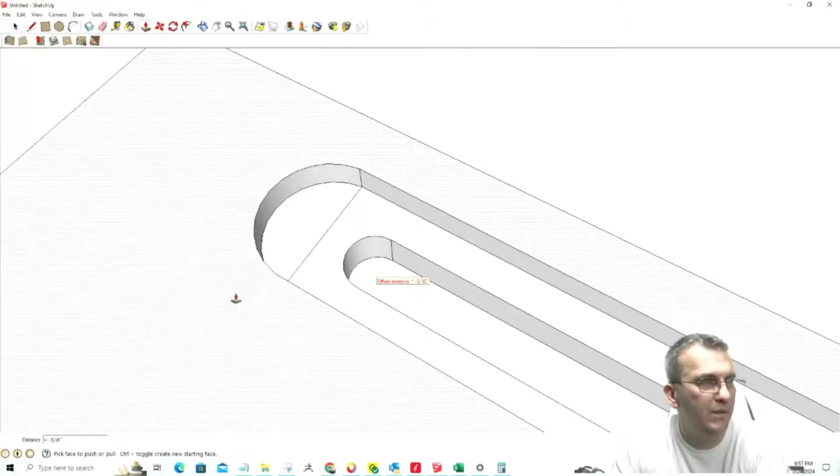And make sure I'm on the right plane there. There we go - push, pull, let's pull this down. Push, pull, let's pull this down. So when my bolt head goes through, I have plenty of room on both ends. So over here we'll do the same thing. Push, pull, push that down to there, get rid of that line. Push, pull, push that down all the way through, get rid of that line.

So this slot is going to have a nice, clean look. My bolt heads can go all the way to full extension on one side, full extension on the other, so I can get maximum movement out of that part to go up to the window, depending on what my situation calls for. I don't need a whole lot of movement, but I want some versatility, some adjustment. My bracket is not going to be this small - my bracket is going to have some width to it, and it's going to have...

Bear with me a second.

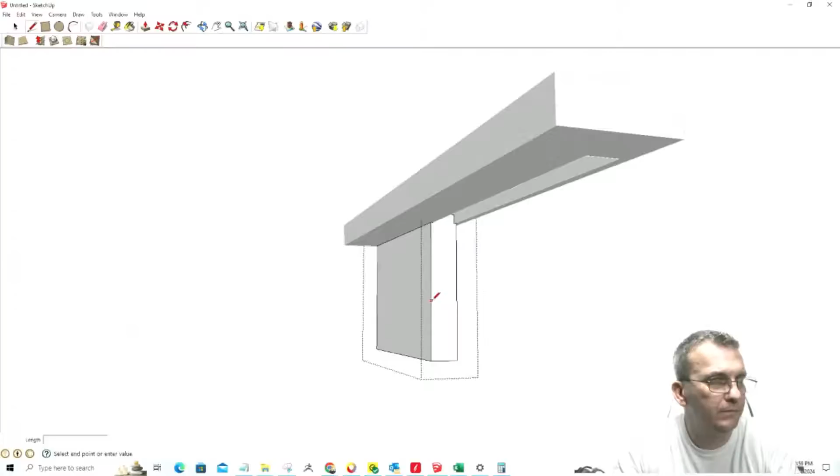That bracket should be able to slide along that slot, and then my bolt goes into the threaded inserts in there, tighten it down.

With this, listen, this is important, ladies and gentlemen. Details matter. My hex head bolt right here, this hex slot, if we go back to the details of this bolt, if I'm not mistaken, it uses a 5/32nd Allen wrench.

So what I'm going to do is provide an Allen wrench with every kit. Let me show you the ones that I use.

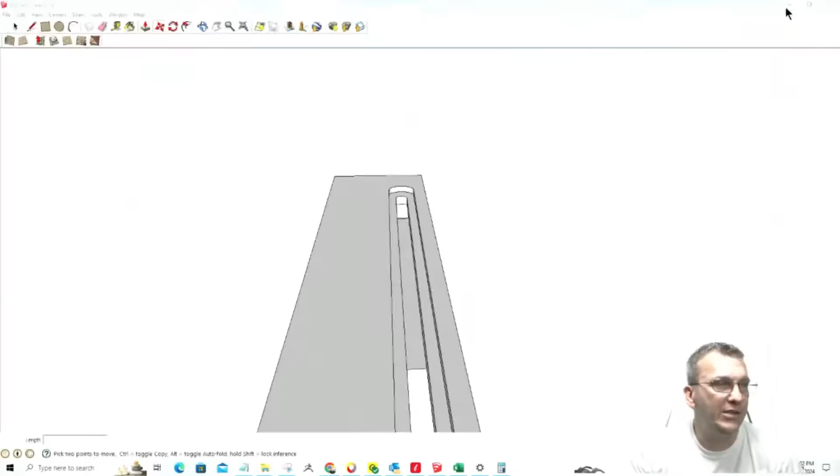So they're going to have that bolt go in there, tighten down, and they'll have their bracket that slides back and forth. So that's going to be that.

Now here, the rest of this part, let me get my tape measure out. So we're a 1/4 inch there. I want to hit escape. I want to come out at least a 1/4, but I can actually go a little bit more. I'm going to go, that's a 1/4. Let's go 5/16 out this way. And this bad boy is going to get...

This bad boy right here is going to get recessed down by... what am I going to do? A 1/4 of an inch. I should be fine there. Let me see if I'm going to be fine. Bear with me just a second.

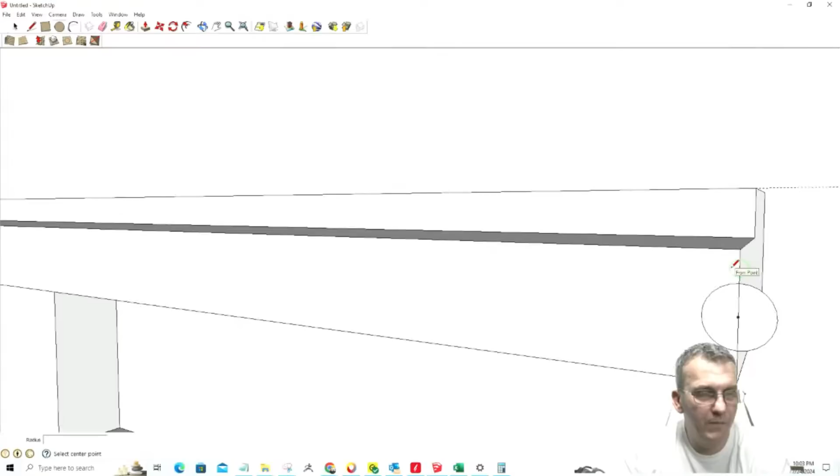Oh yeah, plenty of room. So there's going to be on this end here, a hole that is 1/4 inch in diameter. Let me pull this through. It's going to go all the way through to the other side. And there's going to be a countersink here, and another bolt is going to go in through here into my piece of wood.

Now, hold on, let me explain to you what I'm talking about on a piece of wood. So we're going to take this whole thing here, I'm going to take this, hold down the control key.

I'm going to hit move. I'm going to hold down the control key, so I'm moving a copy, right? And I'm moving 20 inches, so I should be able to type in 20 and move 20 inches over here.

Now I'm going to take this piece right here and flip it along my component's blue axis. Nope, shoot, it's the green. I always do that. Flip along the green axis. So it kind of creates that.

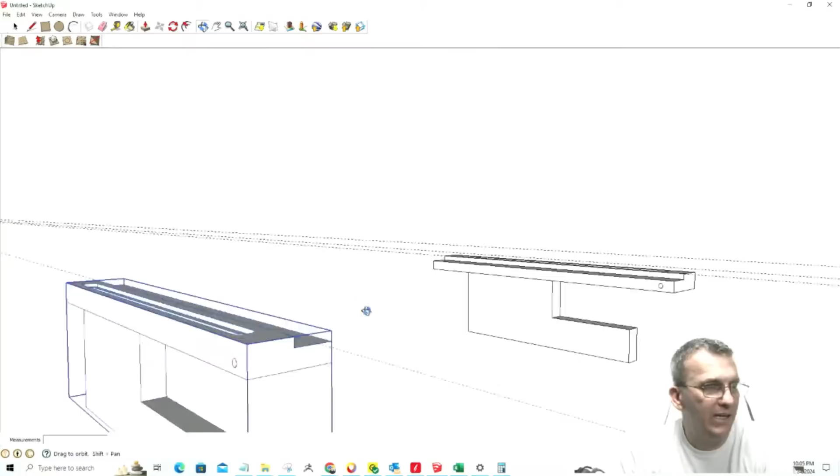Now here, I'm going to have a platform. I want it to be stout, I'm serious, I want this thing to hold some weight and everything, but it's going to be a 3/4 inch board. Let me pull this, it's going to go the full length.

On this board here, it's going to have a rabbet cut out on both sides, because there's going to be a bolt that goes all the way through. Let me draw a line to represent the bolt. There's going to be a bolt that goes from the outside all the way through into a threaded insert to screw into here. But when these lock together, this is a platform and everything, it's going to be nice and flush all the way across the top. This is going to be kind of like a little interlock basically, right? So everything bolts together nicely.

And then of course my bed is going to sit on top of that, right? And my cushion bed and all that stuff.

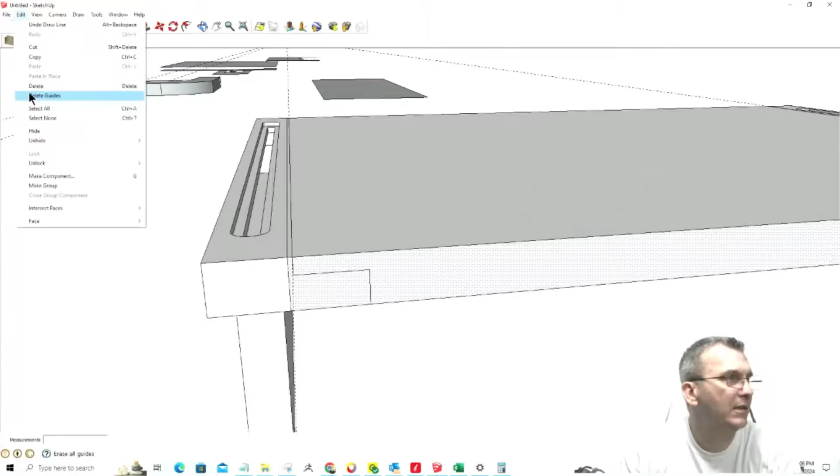So on this part here, I'm going to take... on this part, let me get rid of this guideline. Bear with me just a moment. When I drew my rectangle here, I misdrew it, so let me get rid of that. Let me draw this from here to here to here to there to connect that. Over here. From here to here to there to there.

All right, now I can pull this. Now I can triple click on this and make it a group. And now I can move this so y'all can see what the part is. Oops, come on now. G for group, enter. Move that part up.

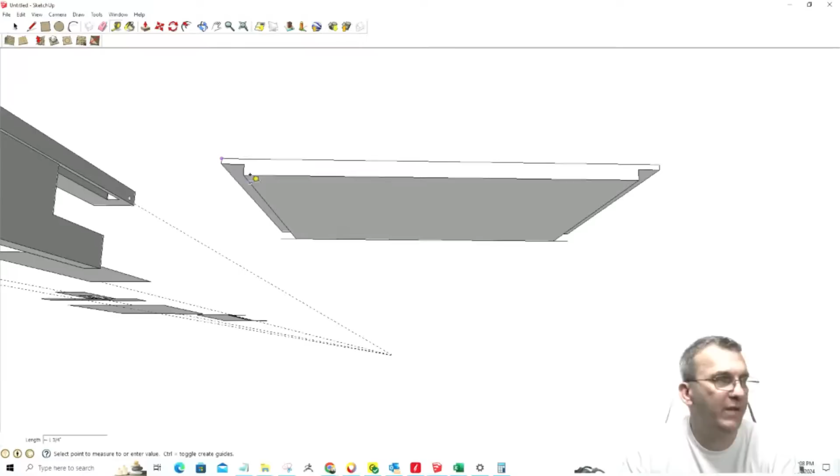So if we look at this part, it is a piece of 3/4 inch plywood. The length and size of it is going to be 19 7/8 inches in length. It is going to be 3/4 inches thick. There is going to be a rabbet cut in it that is going to be a 1/2 inch deep and 1 inch wide.

Okay, and in here there's going to be a threaded insert. Come on, man. Hold on a second, I need to move this up here. Okay, now I can work on the end. There's going to be a threaded insert here and on this end that lines up with the through bolts that are going to be on the two ends there.

And now on this threaded insert with this part, right? This part, the production of this part, I have two choices here. And for me, the choice is pretty easy. I'm thinking about doing it on the CNC.

I'm going to have a jig for the CNC, and my jig is going to help make all my parts, all in one jig that's going to get clamped to the table, and all my parts can be made from it. But I'm going to have a router bit, 1 inch, 1.5 inch router bit that is going to come, and it's literally going to cut this rabbet. It's going to do it in 1, 2, 3 passes, whatever your machine can handle. But it's going to come in and cut this rabbet, then come over and cut that rabbet. And that's its only job on this particular part, the only two tool paths, cutting this rabbet.

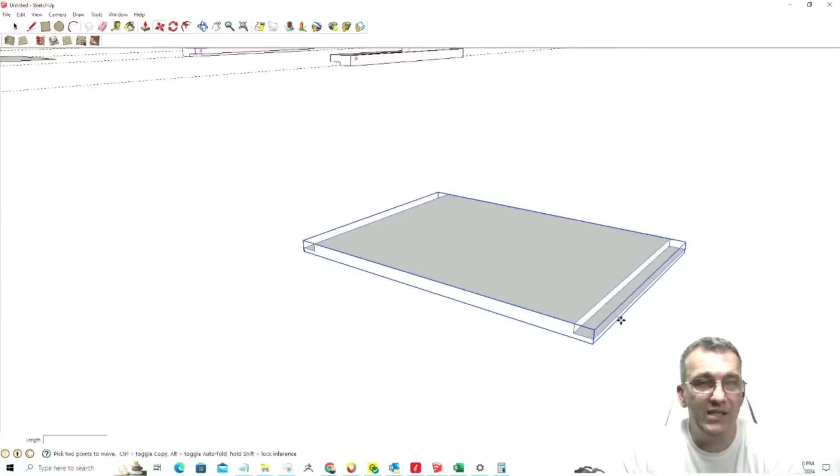Now, when I take these parts, this sheet part, over to my workbench or to its station, or wherever I'm calling it, stations, but I might have a workbench in the middle of my table with all these little platforms and routers mounted, where it's just all around one little workbench in the middle of my shop floor. Who knows, right? It could be anything, but it could just be the top of your table saw for all I care.

But I need to be able to drill these holes and put the threaded inserts in perfectly. So how am I going to do that?

Well, what I'm going to do is the first thing I'm going to do is go with my rotate tool here, and let me rotate this, stand it straight up 90 degrees. I am going to... what the frick, man? Let me get things on the screen here so everybody can see. Jesus, work with me. There we go.

I am going to literally have a jig that literally is opposite of this. So I'm going to have a jig that will look something like this.

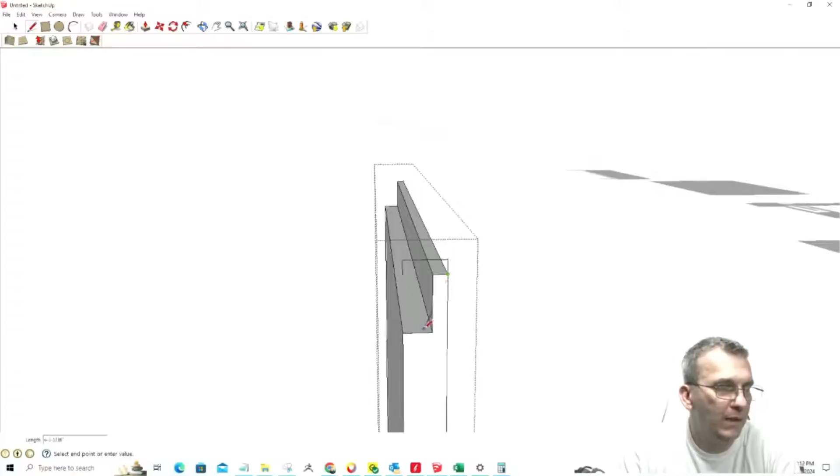I want to be... bear with me. Push pull. Oh, let's see here. Give me just a second.

Come on, man. My mouse movements are terrible tonight. We're going to take...

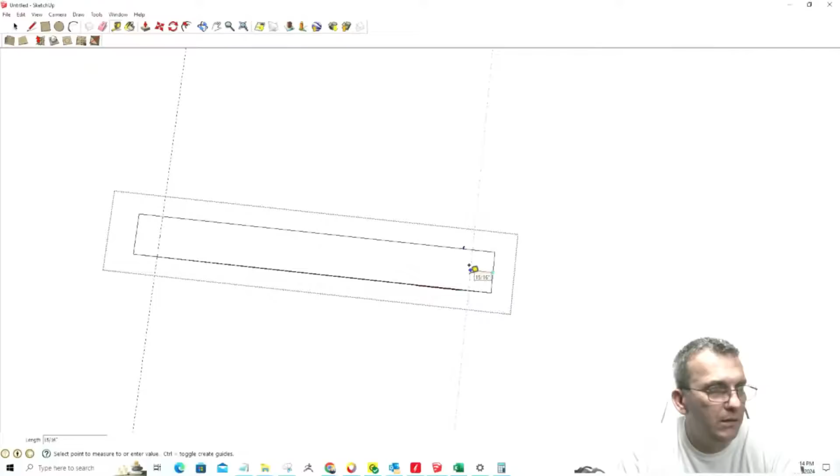9 millimeters was 0.354, and it was 0.177. From that center, okay, I need guidelines, guidelines are my best friend. So 1 inch in. This area right here is a half inch. 1/4. Okay, X marks the spot. So 0.177.

Okay, push pull. All right, my jig. Hold on a second, let me save this work because that just scared me.

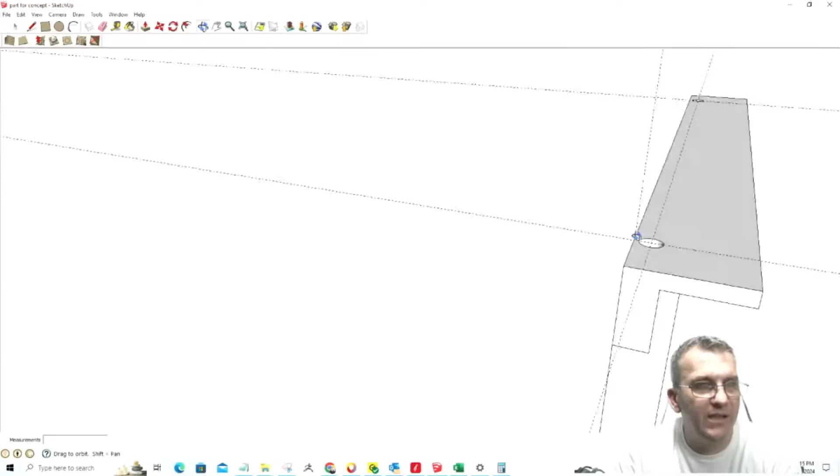Part for concept. All right, my jig is going to be a part that literally fits, and I don't know where my back piece went to. Let me put it back. Push.

It's literally going to have that slot come up, so it hooks right over. Precision counts, my CNC is a precision machine, so when I cut my rabbets, it's going to fit, right? If it doesn't fit, then I need to go back to my setup. But this part slides right over, the ends are nice and flush, and these holes are going to be my guide holes for my drill bit.

I can set up a station again depending on the throat or throw of my drill press, if I can mount this in some way to clamp it right under my drill press. But in this case, if I set it up nice and vertical on my workbench, I put a stop. They sell stop collars for router bits or drill bits. I can set my gauge, my stop gauge, and have it drill perfectly down.

That jig comes off, I screw in my threaded inserts, and done. It will position them and make putting the threaded inserts into the end of this platform easier and more precise. So everything is precise.

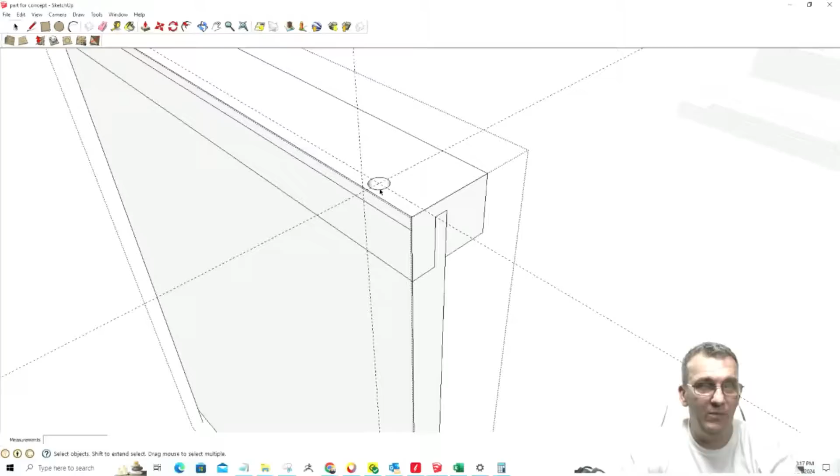I'm going to make a jig that's going to help me with that step of the production. The jig is literally this piece right here that slides right over that tenon. It sits on there, and then I run my drill bit down those guide holes. From the top of the guide holes up on the drill bit, up 0.42 inches, I put my stop collar, and that way when I get down to the stop collar, I know my bit is 0.42 inches into that hole. So I'm going to create that jig.

You can make it out of whatever you want, whatever you need, but that one piece right there is going to have a sole purpose for its job. It's going to be drilling the threaded insert holes, the 9mm holes into this platform, into both ends. So I drill the 2 holes, it gets flipped over, drill the other 2 holes. And that's that step of the production.

So now I have all the concepts kind of figured out. I've got to fine tune the look of the design and everything of this part, but all the concept, this part is literally done. Let me flip back over. This top piece with the recess for the screw head, with the slot underneath for the part, other than the 2 holes and their countersinks right there, that's done.

So if we go back and look at this, let's see if we can find a close-up. If we look at the close-up right here where the mouse is, right at the top, that top window there, and let's see if there's a better vantage point. Yeah, so right there, those holes, those screws are literally going into a steel rod.

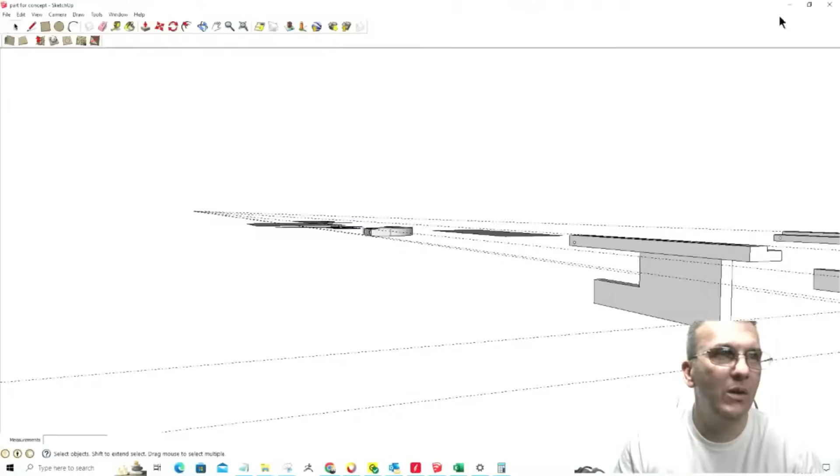Ours is going to be better. So now there's not a real drawing here, you're sitting there going, that's not a real drawing, right? But there will be. This is just a concept I'm laying out in my mind. I'm using SketchUp to help me draw out the concepts of how things are going to fit and how things are going to go. Once I have it figured out, it helped me figure out what type of jig I'm going to need.

Now I can start fine tuning this process, but I'm going to do it in Vectric. I'm going to create my vector drawings and my toolpath to cut these parts out, all based off this concept. Now, if I take the time and draw these parts out to scale, perfectly lay them out in SketchUp, then I can simply import those parts from SketchUp into Vectric.

And that's fine and everything. But mostly what I end up doing is I take my concept here, get everything laid out, and then I can pull measurements. And then in Vectric, I can actually just create the part, and create the tool paths, and see how it's going to play out.

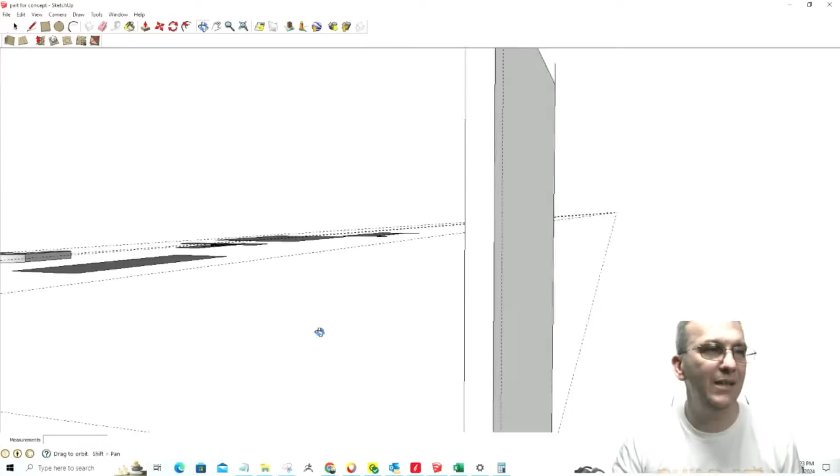Now, one thing that's important is my jig is going to have 2 slots that's going to hold. Imagine this being a 3/4 inch by 2 1/8 inch block of wood, square block of wood. I'm going to have 2 pockets in my jig that are going to be 1/4 inch deep. They're going to be 2 1/8 inch wide, and they're going to be 15 inches long. They're going to probably be side by side on this jig or what have you.

Now, what's going to happen is my part, I'm going to cut down 3/4 inch by 2 1/8 inch by 15 inch long pieces. I'm going to cut all those parts on the table saw or the chop saw, whatever, and have a batch, an inventory on my shelf - all my raw blanks. Now I can pull off my shelf what I'm going to do for production that day, take them over to the CNC, and start loading my parts into the jig.

So I got 2 slots. One slot is going to be for the top half, the other is going to be for the other half. So I can drop the part in there, drop in my other piece, and this jig is going to have 3 stations that it cuts out of - my platform, my lower part, and this upper part. Now this upper part is 2 stages.

It's going to get cut, and then once that gets cut, it's going to get flipped into the other pocket that's right next to it, 180 degrees into the other pocket. And while that pocket is in there, another blank goes into this first one. And then there's going to be tool paths that run just that bottom side, the other side.

So on this top part, the things that are going to get cut is this 0.13 inch deep slot, the through slot here, and this pocket, this rabbet, this recess is going to get milled out - and that'll probably be side 2. Side 1 will probably be this bottom side because there's only that slot getting cut out, and then when it gets flipped over, there's a solid foundation for it to go into.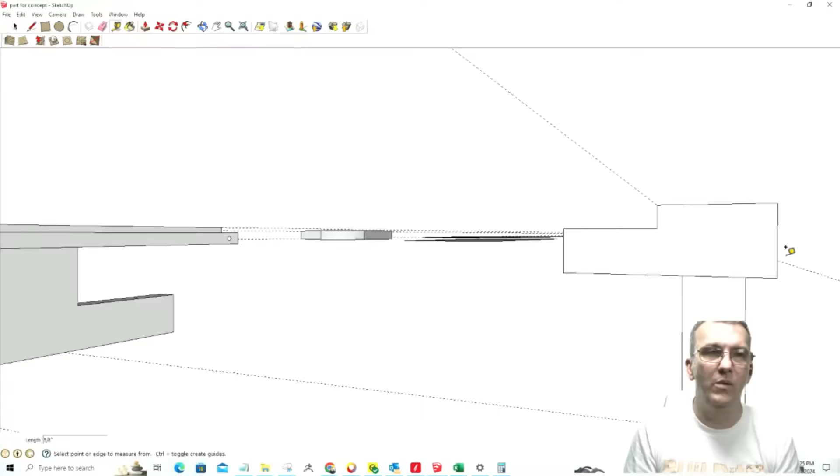So when I flip it over, it fits perfect, and everything. There's no shaking, shimmying, or wobbling, or anything like that.

So first, I'm going to make one part. I'm not going to create the jig, I'm not going to think about the jig at this moment. I'm going to make one part, one project, complete.

I'm going to zero out my X, Y, Z, run the tool path, cut out all the pieces, and assemble them. Then I'm going to analyze the way they were made, the assembly, how everything looks, the finished product. If I'm happy with everything and there's no adjustments that need to be made...

Then, based off of my vectors for that part and the tool paths I made, I'm going to design the vectors and tool paths for the jig that's going to hold these parts. And that jig design in Vectric is going to be my template for my tool pathing. I'm going to use that as my template to tool path all the parts.

So let me show you what that looks like in an actual production situation. So we're going to go to...

If I was smart enough, I copied everything over. Let's see. Let's see if I copied my jig over onto this. Come on, baby boy, please say you did. Say you're smart enough. Wait for it. If I didn't, it'll take me just a second to pull it up on my computer. I did. All right, okay.

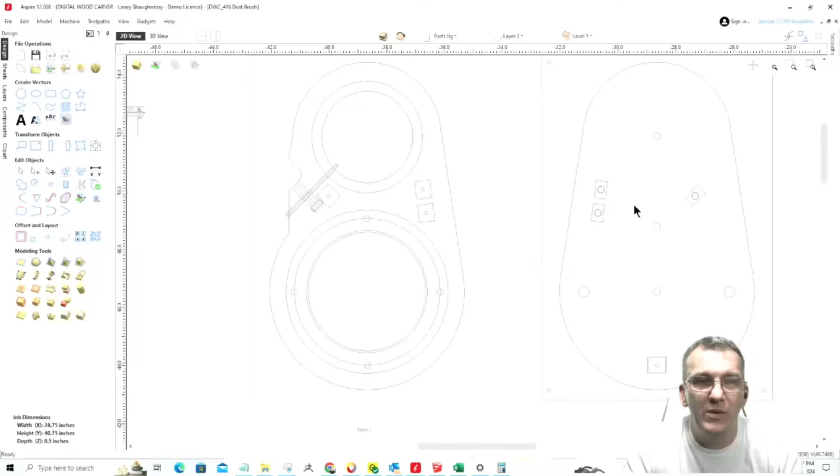None of the other parts do, but when it came to the process of laying this out, my first concept part was laid out with its tool paths. Then once all the tool paths were done and that one part was made, and any little adjustments or changes were made, then my jig was laid out.

So now on my jig here, the first two rows, the blanks go in here. This third row is empty. Over here are the holders that I made that screw down and hold each of my pieces.

But my blanks are 12 by 8, and I cut them out either on the CNC or on the table saw, out of my big 4 by 8 sheet. They get cut out, and I have a stack of them, those 12 by 8 blanks.

So the stack of them on the shelf, I pull from there and fill up all 6 of these holes on this jig. So all 6 of those front holes get done. Then my quarter-inch bit runs all of its tool paths, my eighth-inch bit runs all of its tool paths, my sixteenth-inch bit runs all of its tool paths, and so on and so forth.

Then when that run is done, these 3 right here in the middle get flipped over and put into this side, this pocket. And this pocket has this hole cut out right here so that this part fits right over that hole.

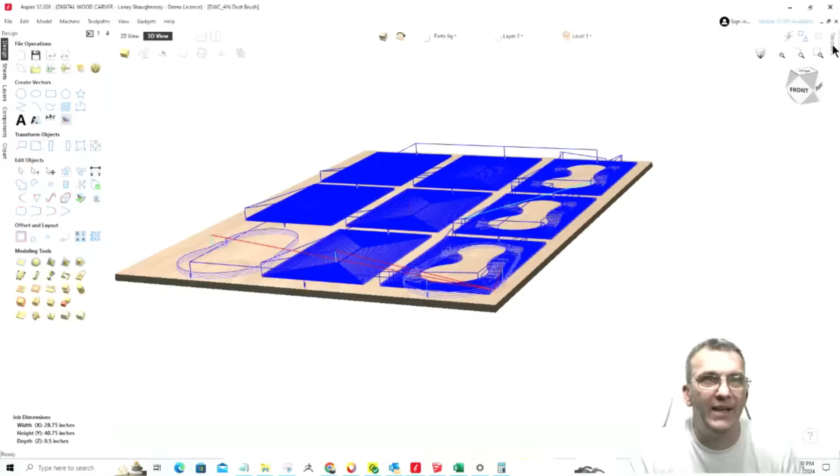Let's see if I can show the jig. Preview. Let me turn down the preview simulation quality to standard so it's real fast. Preview the visible toolpaths. Oh wait, hold on, that wasn't it. Pocket. Preview visible toolpath.

What side am I on? Hold on a second, what side am I on? Top. What am I? That's my hole pattern for the socket holes. All right, there's that. Preview the visible toolpath. Why am I? Hold on a second. What am I missing? What's not showing here?

Give me just a second, ladies and gentlemen. Okay, so that is on. Turn this off, that's a visible toolpath all day long. Well, where the hell is it? What am I missing? View. Okay, let me look at something here.

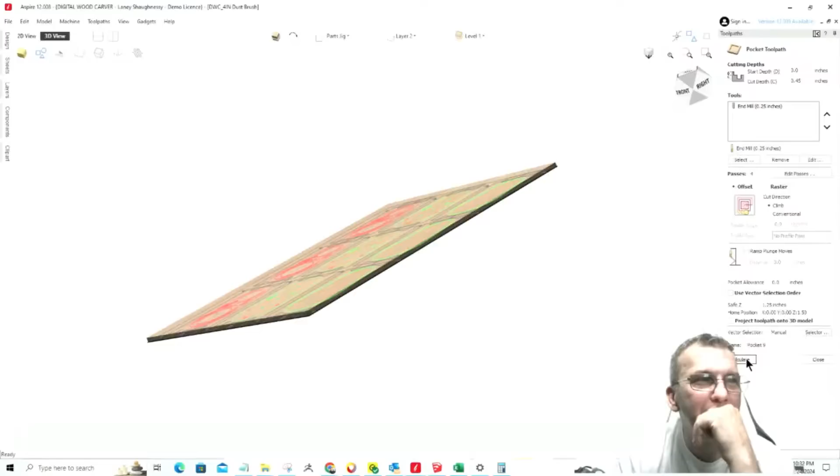There we go. Sweet Lord. Okay, now for some reason my first hole isn't showing up there, but these 6 holes on this jig are blank. These holes over here have this pocket, this recess cut out. When my blanks go into these 6 holes and get cut, these middle rows get flipped over and fit right onto this part.

And then my side 2 toolpaths get run on that. But also on this side, toolpaths get run. These blanks are filled back up with blanks.

And there's a toolpath that runs all my 1/4-inch bits, all my 1/8-inch bits, all 9 of these boxes all at one time. But when these are empty on that first run of the day, there's a toolpath that just runs these first 2 parts.

And then when these get flipped over, I have a toolpath that runs all the bits. All the 1/4-inch bit does all the 1/4-inch stuff, all the 1/8 does all the 1/8, all the T-slot does all the T-slot. Everything is done all at once.

And then now I'm taking these out to the workbench, these out to the workbench, these get flipped over to here, and then these 6 holes get filled up again with blanks, and it becomes a production line. Boom, boom, boom, boom, boom, boom.

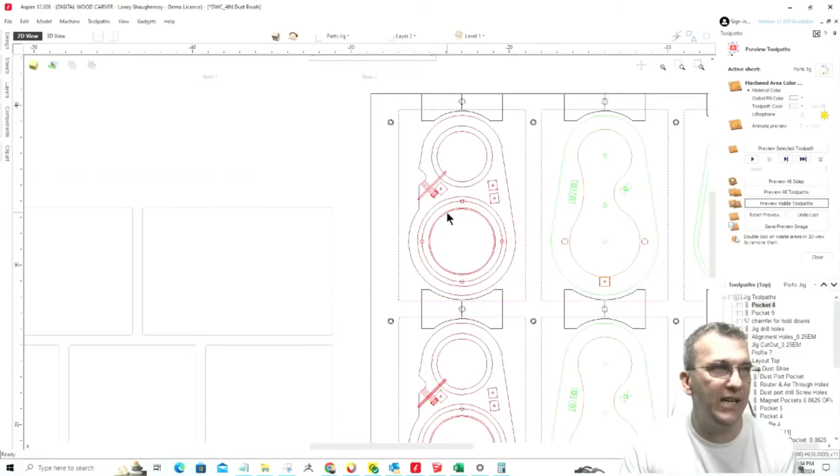How those parts fit in the jig, how the parts are going to get set up - even my hold downs had to be considered. When my router bit comes and cuts this part out, it has to clear the hold down. So there has to be a space in here for that router bit to travel so it doesn't hit the hold downs. So everything is thought about.

These holes are threaded inserts, so my hold down screw goes in the same place in a threaded insert every single time, my clamps and all. And so everything is precise, concise, and everything.

This little hole that you see right there, if I need to bring my 1/4-inch bit and drop down in that hole to make sure I'm zeroed out perfectly, it's kind of like a little test hole for me. But now that I have a 1-2-3 block, I don't need to do that anymore.

I can tell my bit to go down to 1 inch, and I should be able to slide the block underneath it in this pocket and everything. I can tell my bit to come within 1 inch of this wall, and I should be able to slide that block and the bit kiss in there.

I can check anywhere that I want to on there with that precise 1-2-3 block, and I can know that I'm perfectly laid out on my jig. And on my table, my layout has 3 different stations on it, and those are called coordinate systems.

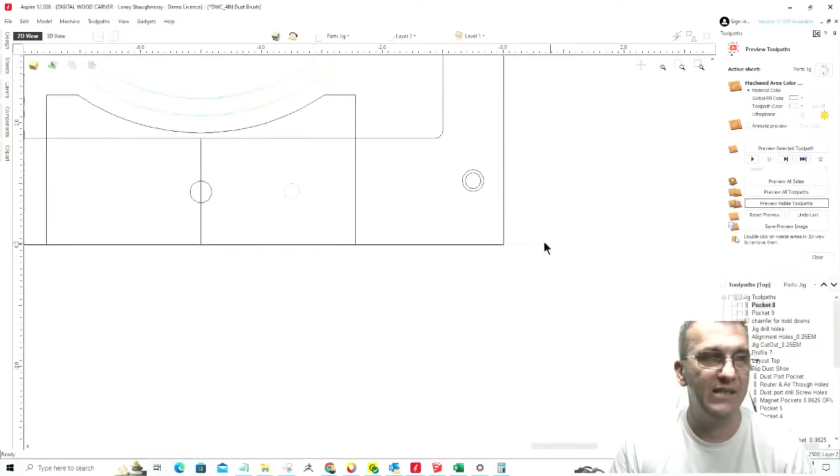We talked about that a little bit last week when we discussed how I can make my CNC machine move to any one of the coordinates, the 0,0 coordinates. In this case, the 0,0 is this bottom right corner of this jig. Those are all pre-programmed into my software, and it knows to move over to that location.

We'll talk about setting up coordinates one day. We'll physically go out to the CNC machine in a class and show you the setup and all. But that jig that's going to be manufacturing my individual parts...

Once I get it figured out and laid out and everything, then I can start to toolpath. Now I create my jig toolpaths - my jig toolpaths for when those parts get cut out on the jig, part side A and side B, or on my jig, my dust brush toolpaths and all. So when those parts get cut and everything, the toolpaths for the jig are now laid out.

So when I throw blanks in there, my CNC knows exactly where to go to cut out those parts from those locations. My jig is my template. My jig in the software is the template. So when you create your design for your jig, you use that design as the template for your tool pathing.

Does that make sense? Do y'all understand that? Y'all got that? All right.

Brooks Martin, you mentioned tempered steel. Can you reiterate that question a little bit more? What's the question about tempered steel? Can you give me a little more on that one?

Okay, let's go back. Let's minimize out of this and go back to here. Once I have the concept and everything defined for my part, what problem is it going to solve for me and hopefully for everyone else?

It's going to provide a luxury window system for a cat that's more comfortable on their joints. That egg crate cushion is going to help with joint pain relief. These are bullet points I'm going to put on the website page: what is it, why buy my product?

It's going to be a more stable platform, with a no-marring, easy-to-adjust design for all window sills, as long as it meets these guidelines. The egg crate cushion is going to be ergonomically comfortable for the cat and help with joint pain, so they can enjoy the great outdoors as they stare out the beautiful window.

I'll have all these bullet points and descriptions of my product that go on my website, and on Amazon, Etsy, wherever I'm selling. Then I'm going to test it, make one, work out all the bugs, and then design it. So I've got the concept design, just a rough, very rough concept design.

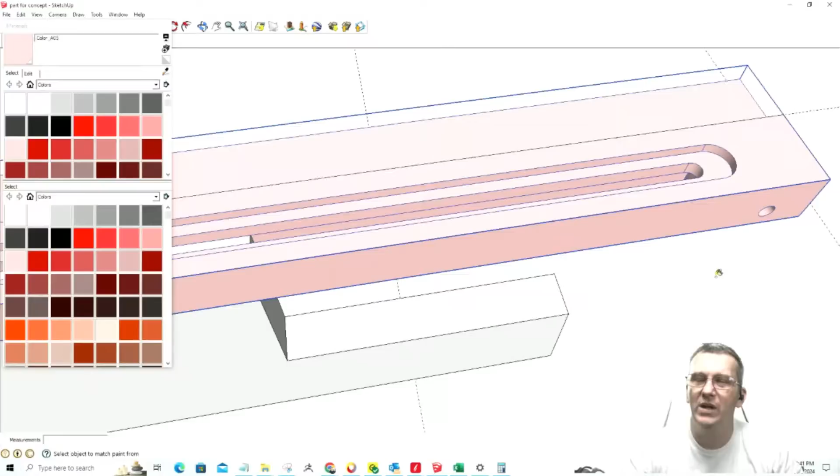So this part right here, I will probably fillet the edges so that when this part gets cut out, the final profile cut out on the jig, it fillets these edges to soften it up. I might even run an 1/8 inch round-over bit as one of the toolpaths to round over not this inside edge, but this outside edge, to soften it up. Most likely I'll do that in Vectric, and figure out how I want to finesse this part.

But this part is done other than the hole placement. Now the hole placement, I've already designed on my platform right here.

That hole placement, I've already kind of decided that if I take my tape measure, it was 1 inch in from the edge, right? And it was split on that lip. So that means...

I'll just come in from this side, because these holes right here, this hole, this is not going to get done on here when it's flipping two sides. Either there's going to be a jig that cuts out those two holes on the drill press, or this part gets flipped up vertically, flipped up 90 degrees, and the CNC is going to cut those two holes. That'll get worked out in the details, but the hole placement is centered and 1 inch in.

So that's 1.25 inches, 1 inch in. Hold on a minute. Come on. 1 inch in, that's where, and if we draw the circle, it was 0.177.

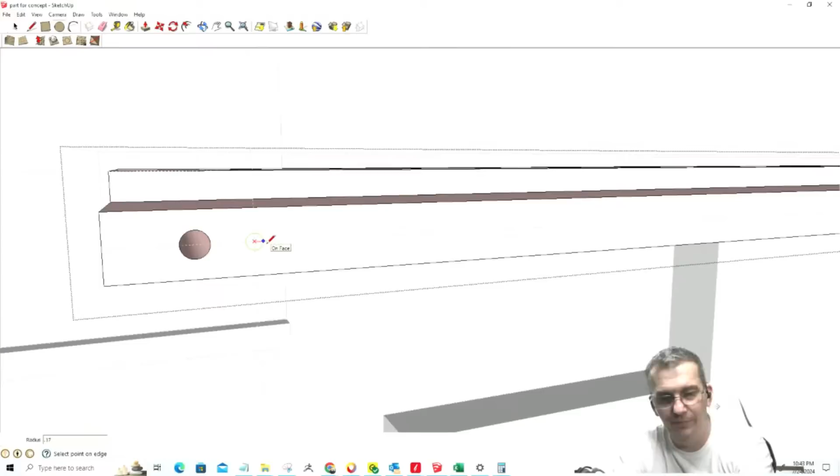Hold on, let me check this. It's not 0.177, it's 1/4 inch, because the 0.177 is for the threaded insert. I almost screwed up. This is a 1/4 inch bolt, and it goes on a 1/4 inch hole, so it slides right through at 0.26.

So 0.26 on that... 0.26 divided by 2 is 0.13.

All right, and then same thing on this end, 1 inch in, centered, right at that midpoint. I'll go ahead and put a guideline there again, but it's 0.13. So now those two hole locations are defined. I can even pull them if I want, but those two locations are defined.

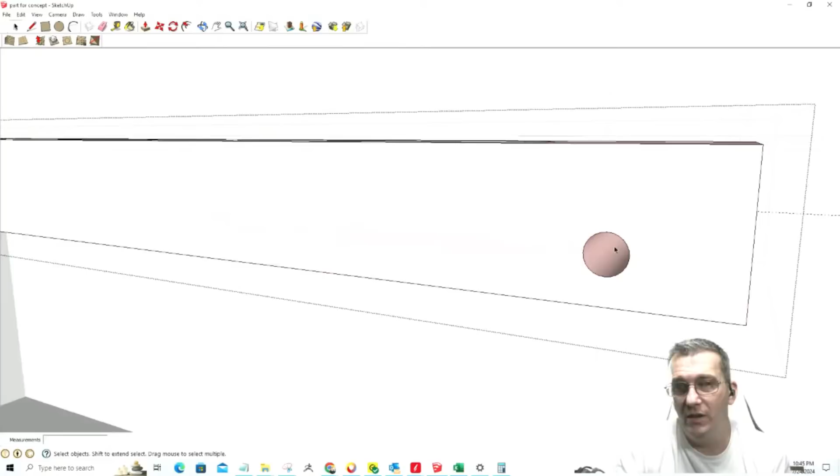Now that's on the inside. No countersink on the inside, right? But on the outside, there's a countersink. Depending on what bolt I decide, I'll figure out the diameter of that. If I do turn these up vertically and the holes get cut, the countersink gets cut first, then the through hole gets cut second in the toolpath operation, same bit. So it'll be a pocket cut that does the relief, basically the countersink, and then the same bit is going to do the same cut. So it'll be one kind of two separate actions, but all at one time.

So with this part laid out, in Vectric I just have to do an offset based on what my countersink is going to be. I'll do that in Vectric, I don't need to do that here. So this part is done, this part is basically figured out from here. But what we're going to do, of course, is clean it up in Vectric, and make it nice and curvy and stuff like that.

I really like the shape of that, the foot and everything, but I don't want it to be exact or anything like that. It doesn't have to be exact. I want it to be close, but also I want a little bit more meat back here because I might want to customize these side rails.

I could customize them with cute, funny little things, little cat paws, little mice, hearts, whatever. If you look at some of these options, you can see they've done little decorative cat paws, with star knobs on the top - that drives me crazy. It's uncomfortable. If the cat's laying its head on it, and it's a big cat, I want a nice smooth surface. Even if I put a thin pillow on there, I don't want to feel bumps through the thin pillow, you know what I mean?

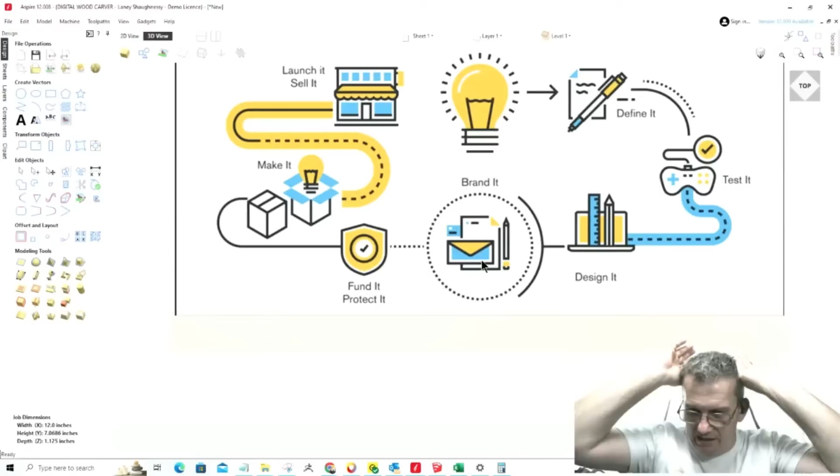We're gonna market it, because I have an audience for this one on Family Members Facebook page that loves animals and all that stuff, and I have a woman who does animal adoptions and works with the Humane Society. She's going to be a little salesperson marketer for it, and I've got people that'll spread the word. I'll offer her a commission on every sale or referral that she pushes out from her people.

And now I get a little business going, a little side hustle going on a cat window mount, perch, whatever. But now the brand - what are we going to call it? Are we going to just call it a cat window perch, or are we going to come up with a name for it? We've got to kind of brand it.

And then we also have to, not only with the branding, but it's going to have 'made by Build It TV' - or whatever my company is, Build It TV LLC, or whatever your company is. From there we're going to have the description of it, and all the key bullet points - like I said, it's ergonomically comfortable, less joint pain, more sleep and comfort.

And I'm going to have little pictures, beautiful pictures of Tiger Lily laying in the bed, enjoying the sunlight, playing on the window, all on this cute, lush mattress. And then my goal - now I'm going to be buying these mattresses, so there's already $36 right there just in the mattress alone.

We are now going to design the part, get the tool paths and everything, and have this thing ready to make. So that's what we're going to work on. In the meantime, I'm going to start looking up all the different hardware and get some of that ordered in, maybe some Amazon Prime parts, so we can go through it. If everything works out, we should be able to make this part. I'll also see if I can get internet out in my shop so we might be able to do some CNC stuff.

So I want to thank you all. This is where we're leaving it here, but I think this is important. It's not the best project in the world—you have to understand we're just doing kind of a concept thing. But this relates to any product that you're wanting to make and design, so we have to go through these phases.